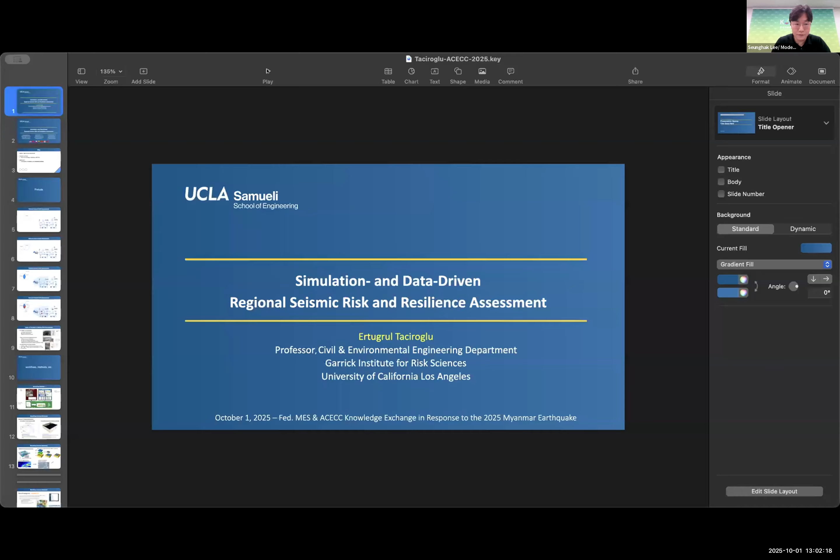Yes, Professor Taciroglu. Hello, everyone. Thank you, Seunghak. Can everyone hear me? Yes, very good. And see my slides? I can see that.

Okay, great. So I want to talk to you today about simulation and data-driven approaches to regional seismic risk and resilience assessment. And as Seunghak mentioned, I am Ertugrul Taciroglu. My name is a little bit difficult to pronounce, so people call me ET using my initials. I'm a professor in the Civil and Environmental Engineering Department at UCLA, and I also am a faculty affiliate at the Garrick Institute for the Risk Sciences at the same institution. And I'm happy to be here presenting our work at UCLA. I have many collaborators from many different countries helping all of this work, so I'd like to begin by acknowledging them.

So here's a map for my presentation. I want to talk to you about hazards engineering in general. What are the fundamental aspects and elements of doing hazards engineering? And this applies not only to earthquakes, but also other hazards like hurricanes, wildfires, you name it. Then I'm going to be specializing in the methods and tools that we use for seismic hazard engineering. I'll talk about the domain knowledge that we need for this and typical workflows to do what we need to do as engineers, and some of the aspects of the high-performance computing tools and machine learning algorithms we're using to be able to do these tasks at regional scales.

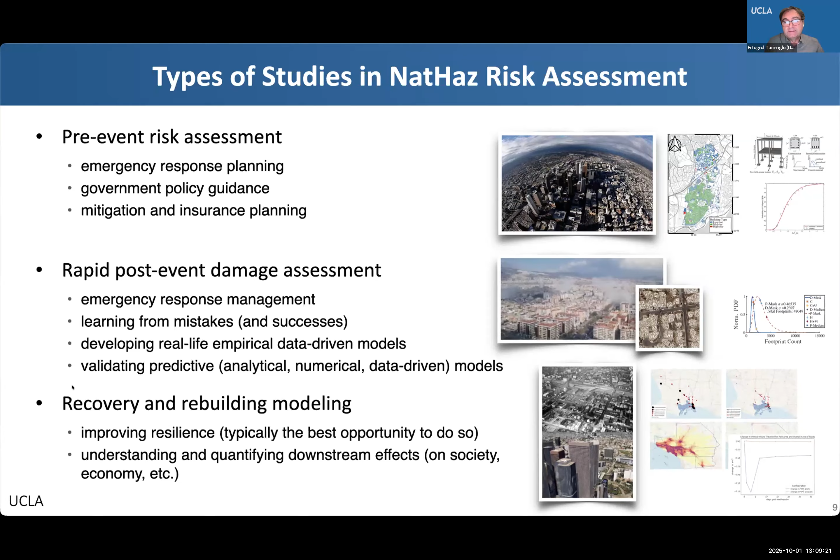So what are the typical workflows to do all of these three types of studies? And they, again, come in three pieces. One is you need to build a model of your assets at regional scales. Where are my buildings? Where are my dams? Power lines, all of these things that are exposed to this hazard. And then you need to be able to create models of these assets so that you can do analysis. So that's element number one, asset models. And I'll talk about how to generate asset models at regional scales a little bit later.

The other element is determining the hazard at a given location. What, again, is the probability of having an earthquake magnitude or a larger magnitude at a given location? If you know these probabilities, then you can design accordingly, right? So this is the hazard characterization portion. Once you have a characterization of the expected hazard, what are the probable earthquakes in this particular location of my buildings or my city? And once I have the asset models, I can combine them and do some analyses.

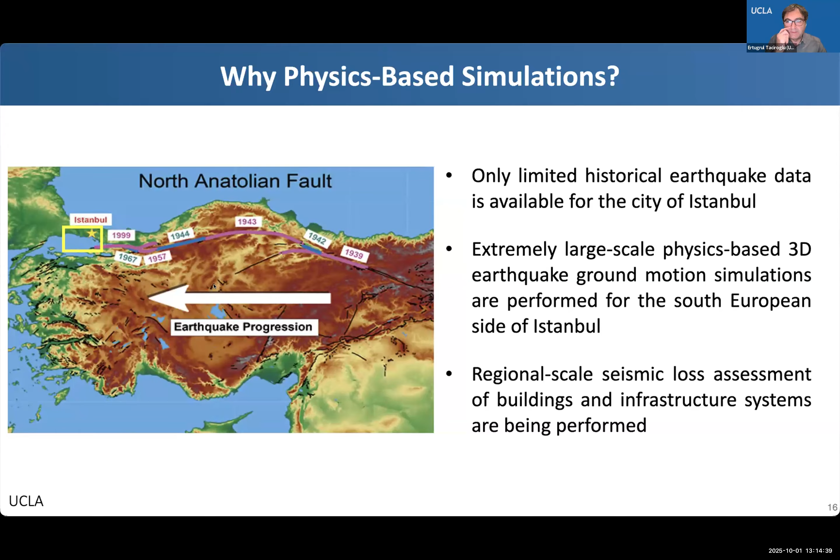The only problem here is that this fault doesn't create many small earthquakes or mini earthquakes. So generating data-driven models is very difficult. So we have to use earthquake simulations. So we have carried out very large physics-based three-dimensional simulations for this very dense portion of Istanbul. And then using those simulated ground motions, we have done an analysis of the probabilities of damage and collapse of a certain building stock within the city of Istanbul.

We were able to do so because we knew the ground characteristics of the region, obtained from the municipality of the city, where they have done many boreholes and obtained geological data with which we could create our models. And then we have simulated 50 to 60 probable earthquakes in this region to understand what kinds of earthquakes might happen. Again, these are very, very large, very fine detailed simulations that we run on supercomputers with billions of degrees of freedom.

This is a technology that's available and that can be applied to different portions of the world, provided that some geological data is available. And then once we obtain these ground motions affecting the region, we focused on different clusters of neighborhoods. This is one neighborhood in that city called the Zeytinburnu district. And we've created models of approximately 16,000 buildings in the region by using computer vision tools and some heuristic models. And then we've analyzed the responses of each of these 16,000 buildings to 60 different earthquakes to obtain their probabilities of collapse if these earthquakes happened.

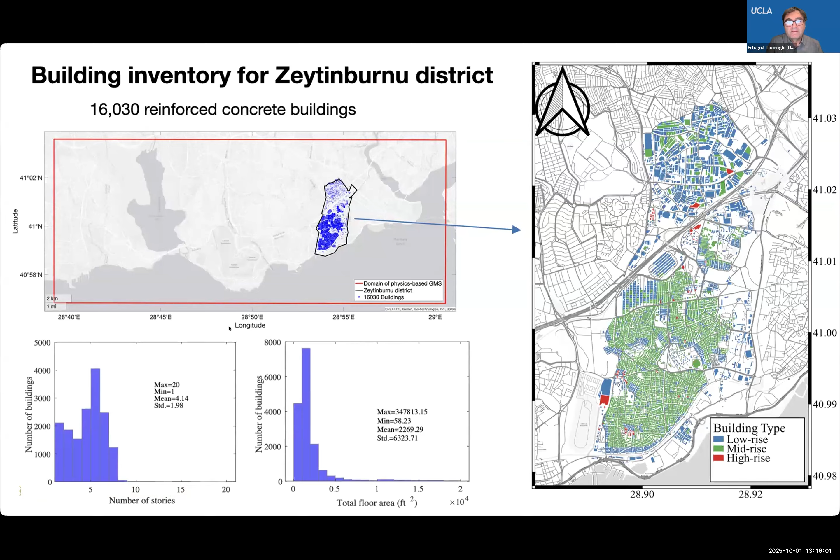And these analyses of individual building models under these 50, 60 scenario earthquakes were done again on supercomputers. And if you've done any supercomputing, you would know that this is a very scalable type of calculation. Each analysis of each building can be done independently. So if you have a very large supercomputer, you can actually do this in a very reasonable amount of time, within a few hours, etc.

So for this particular case, we have done almost 1 million individual nonlinear finite element analyses of these buildings. And we've obtained these so-called engineering demand parameters, like what are the maximum interstory drifts they are going to experience.

And this information tells us what is the probability of collapse. So we could create fragility curves and probabilities of collapse maps, and we could communicate these to the government, and then they can understand which buildings are the most vulnerable and what kinds of emergency responses they need to do, what kind of mitigation studies they need to look at. I'm skipping some of the details, but we've published this work, and if anybody's interested in the details of it, of course, I can provide you more information.

And these 16,000 building models are fairly accurate, but not accurate to the point of being almost a digital twin. But we also have those capabilities of creating digital twins, very, very detailed models of buildings individually and analyzing them individually under earthquakes as well. We can inject the regional simulations into a local finite element analysis box and do sophisticated analysis involving soil structure interaction. You're seeing a hospital building that's a braced steel frame that is base isolated, sitting on top of some soft soils, and we can analyze the response of these individual structures as well.

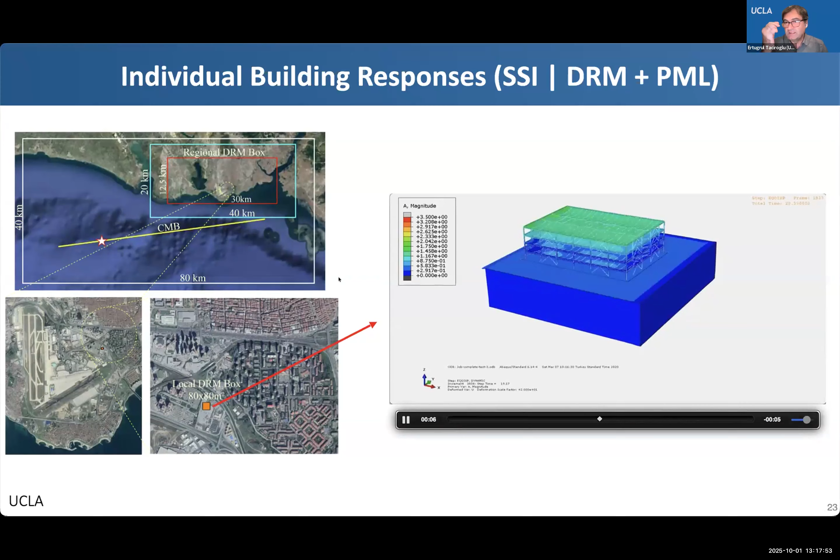So how do you generate regional asset models? How do you generate like 15, 16,000 building models? So I'm going to give you examples of work that we have done in Southern California on bridges. We have also done stuff for buildings, as you've seen, but I'll give you a more detailed description of what we've done for bridges. Bridges are nice because you drive under them, over them. They have many pictures. And so they're amenable to automated generation of structural analysis models using machine learning tools and other techniques, photogrammetry.

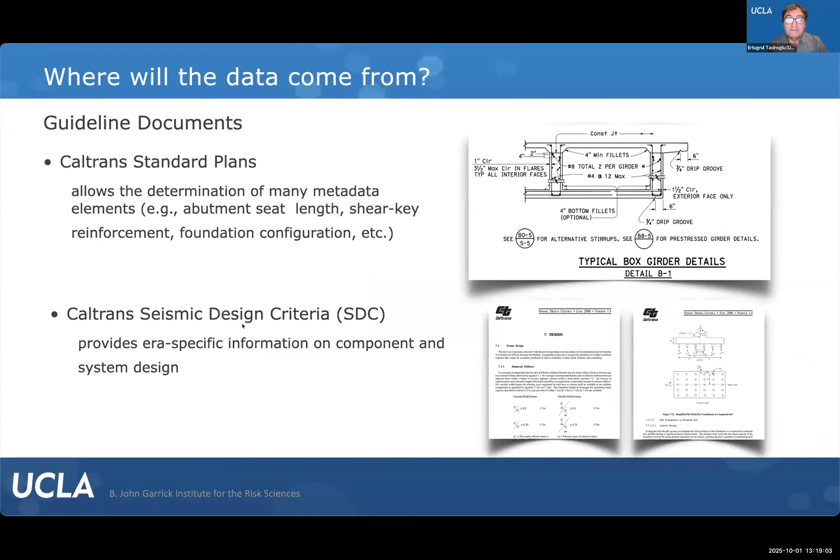So we've extracted some information from national and state databases, which is incomplete information. They're never enough to create detailed models. And there are things that are not quite visible, like reinforcement ratios and some of the structural details. But those are available in structural design guidelines of the state of California and the United States in general. So once you know some basic metadata, year built, et cetera, you can estimate and back calculate some of the other information from these design guidelines. Finally, you can combine that information with information you're observing from satellites and street view images, and you can create detailed models of these bridges.

Again, I'm not going to go over the details of our workflows to generate these bridges, but it starts with satellite imagery. We identify the bridge spines, and then we go to street view image resources and extract all the images that see this bridge from its deck and from below. We combine them, do some machine learning and photogrammetry, and identify their attributes with which we can create detailed models of these structures. Here's an example.

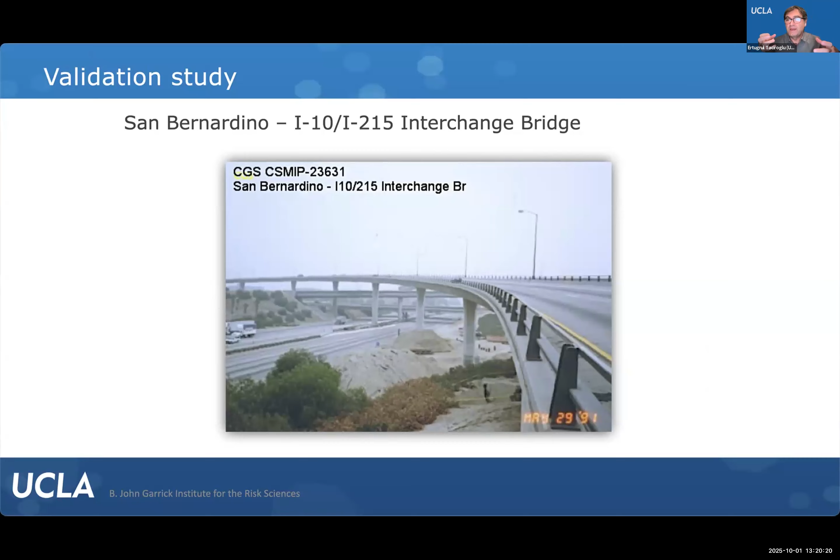This is the Colton interchange. It's a curved large bridge that is actually crossing over a fault line, and our Department of Transportation, Caltrans, was interested in us creating a model for it, so they gave us the structural drawings. We've created automated models of this bridge, and we compared it with the model we generated from structural drawings to see how accurate we can get from just image-based models. Even if you look at this bridge's photographs with your human eye, you may get confused as to which column belongs to this bridge, etc. But our automated algorithms can extract thousands of images automatically and identify all of this information.

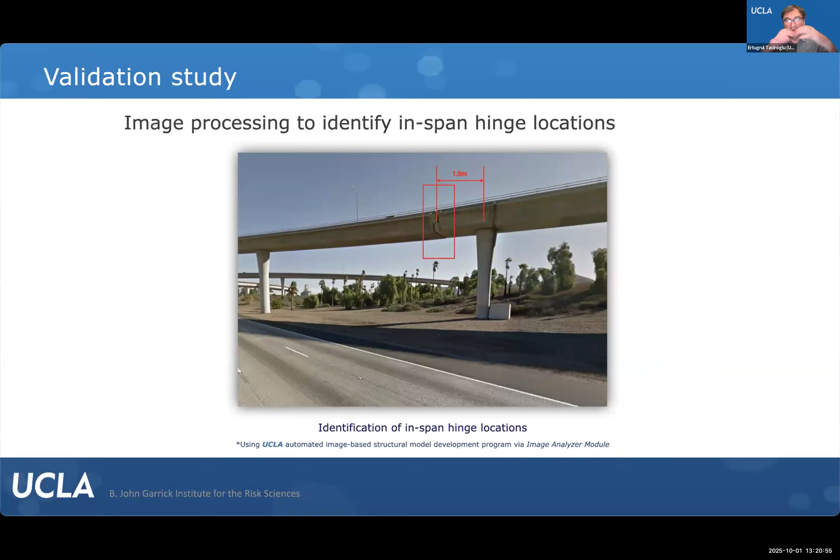Again, we start with the top satellite imagery. We extract the bridge deck elevation and elevation under the bridge of the surface so we can get freestanding column heights. Using photographs and machine learning algorithms, we can identify where the bents are, the columns and piers are. Not all of them are visible in all of the images, but a synthesis of all the images will give you more or less everything that you need. We identify other important details like the seat lengths of the in-span hinges. In California, some are shorter inadvertently and they are prone to collapse. So this seat length is an important parameter to extract.

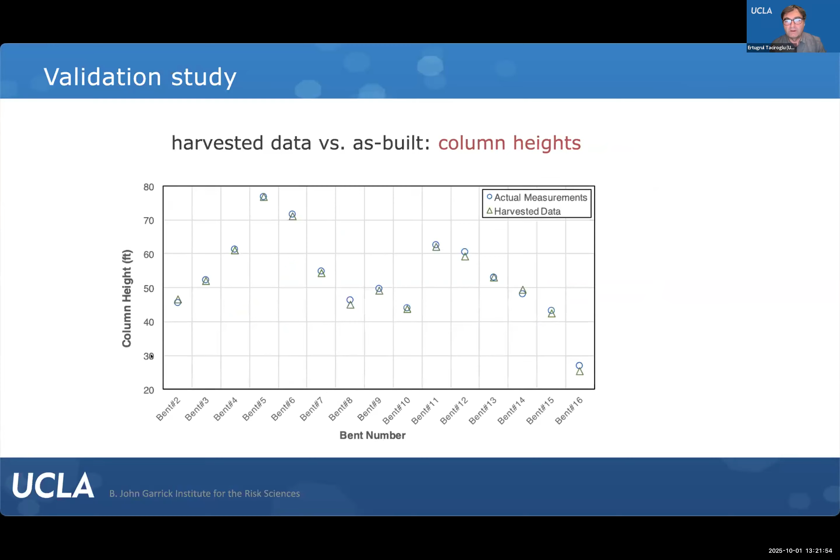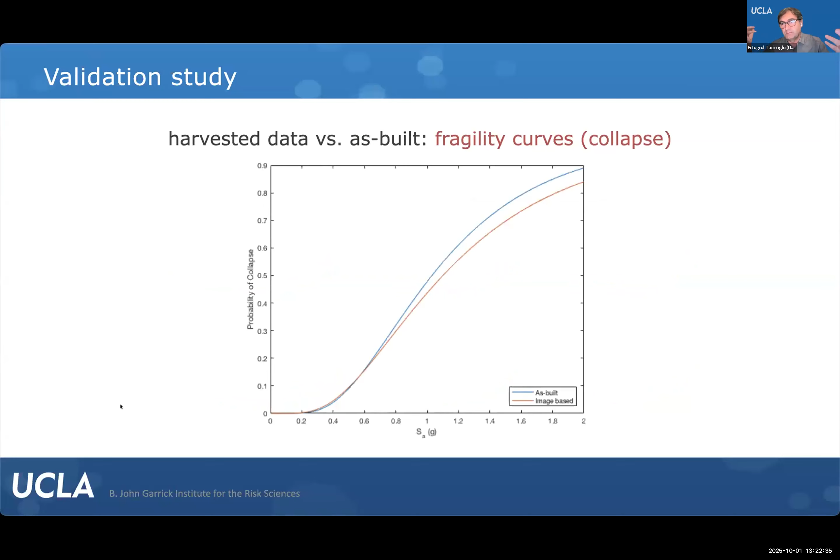And the bottom line is how accurate is the fragility curve that I obtained from the as-built drawing model versus the image-based model. And as you can see, this fragility curve between the two options is quite accurate. So this means I can use this in regional scale assessment of what may happen to a network of bridges in a given region. We've done many different bridges, you name it, and these are all automatically generated models.

And we've applied this technology to, say, the Port of Los Angeles, which is one of the largest ports in the United States, where all the goods coming from Asia are imported into the United States and get distributed. Of course, the port structure's seismic safety is important, but it is also very, very important to understand how the bridges around the port are connecting the port to the inland.

My location right now is in this map somewhere nearby. I'm just basically like 20 miles away from this Port of Los Angeles. We've simulated, say, a 7.7 earthquake, and then we've looked at analysis models and then obtained damage probabilities or damages to these bridges that we've modeled.

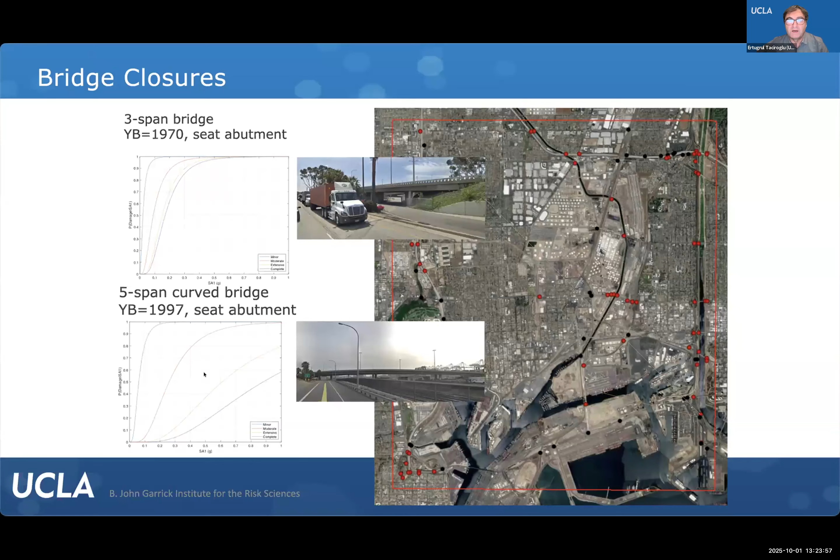So we could communicate this to the government and tell them the true value of those bridges, which far exceeds their nominal value. If a bridge closes down around the Port of Los Angeles, the amount of money it loses in a day is millions of dollars. And in a few days, it will have been losing a lot more money than its nominal value. So bridges are extremely important. So these types of analyses can illuminate that type of result.

We've also created computer vision-based, machine learning-based tools for buildings. These are tools I directly led the development for, BRAILS++ and Fortuna. BRAILS++ and Fortuna were developed initially specifically for hurricane hazards, but we've extended them also to earthquake hazards recently. So as long as you have images from the streets that you can obtain using basic cameras, we can create models of these structures quite easily using different types of algorithms.

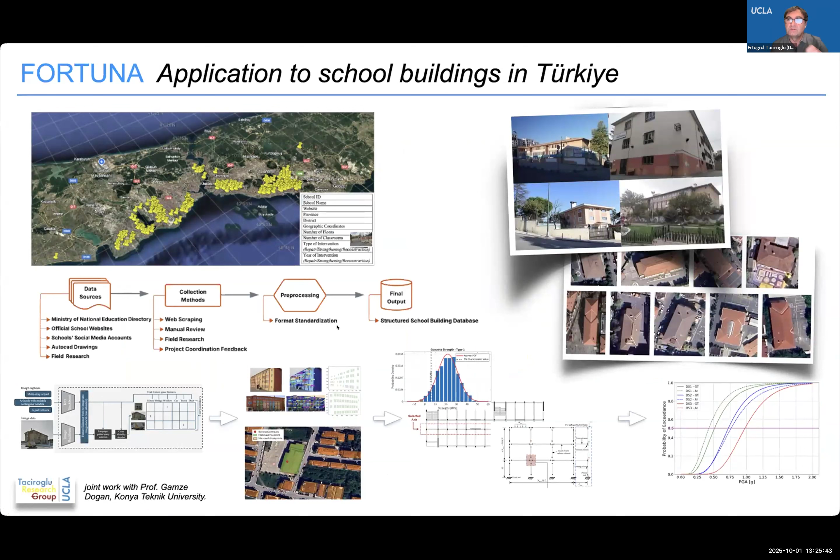We've applied this technology recently to school buildings in, again, the city of Istanbul, which are home to many children and hence are very important. So we're now doing an analysis with the government of Turkey to assess the vulnerability of these school buildings in this pilot region, to be extended to other seismically vulnerable regions of the country.

Do we need to stop operation and evacuate? When will it be safe to return? Where should we send the first responders? And then also, can we quickly assess the damage? And in that last question, there are several sub-questions: is there damage in the system, whatever that system is, is it a hospital, school building?

That's detection. Where are the damage components? That's localization of damage. And those two questions are relatively easier than the last one, which is quantification. What is the loss of strength and stiffness? Can I determine these? If you can answer these three questions, then you've done an excellent job. They're not easy. The typical approach around the world right now is generally visual inspections. Visual inspections are subjective, labor intensive.

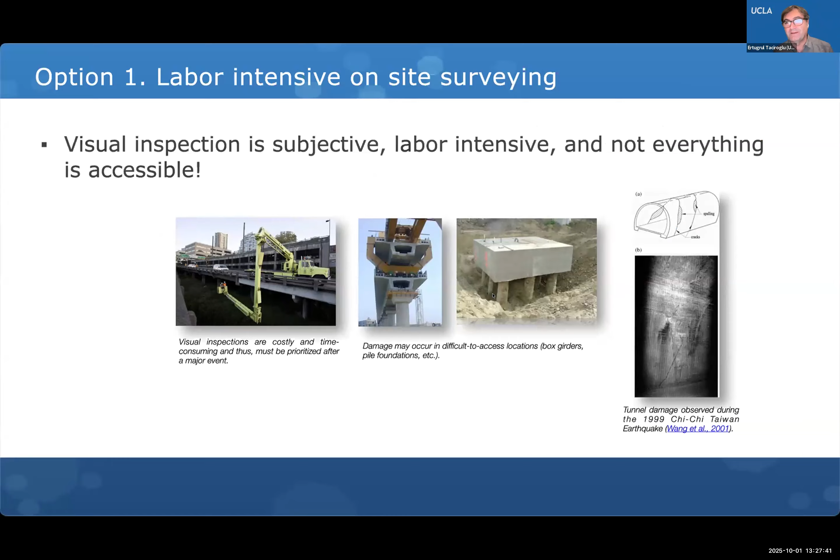They're not going to tell you especially the answers to that last question. If you have a tunnel lining that's cracked, then I ask you, what is the loss of strength? It's not easy just by visual inspection to answer that. If you have hidden structural members like pile foundations, you need to dig them up to see what kind of damages they may have suffered. So that's one option, but it's not a very fruitful option. It doesn't scale well to regions.

Another option that scales well to regions that is now becoming very, very accurate, which we've applied again to Turkish earthquake data, is using unmanned aerial vehicle images and satellite images, especially microsatellites that give you very fine resolution images from the sky. And then by training a machine learning algorithm, within minutes, you can assess the damage in a large region in broad clusters. This is detection and localization of damage, but not necessarily quantification of damage. But you can do that, and this is feasible.

Of course, if you send out vehicles with cameras, now you can get a much more detailed assessment, and we've done so. Another feasible option, which is much better than the labor-intensive visual inspections, is to have seismic instruments on buildings, especially important buildings like school buildings, etc. Seismic instruments have become cheaper. You can put them on buildings. You're seeing the study that we have done for the United States Department of Veterans Affairs.

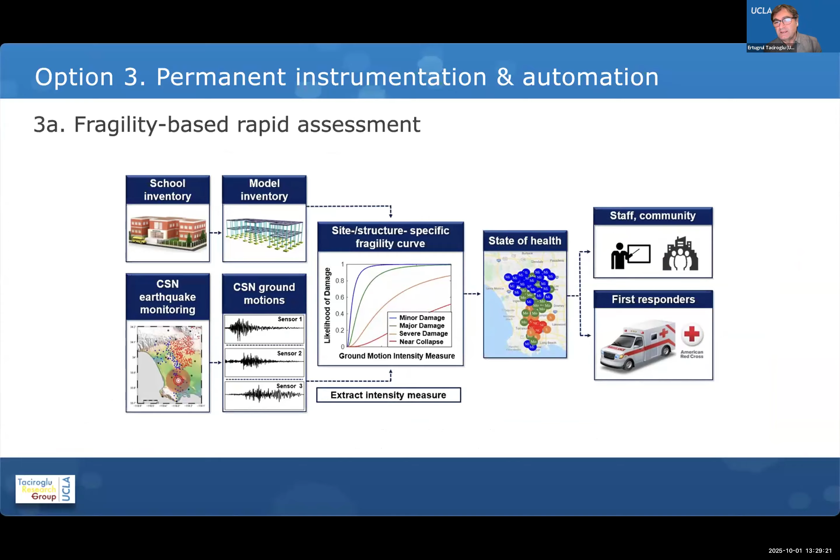They have many hospitals. We have seismic instruments in those hospitals, and we've created software with which they can rapidly analyze the damage level in those hospitals after an event without sending anyone there by using the sensor data that was collected. And you can use the sensor data in different schema, combining them with fragilities to do regional assessment. And you can quickly tell what happens in a region, which buildings are safe, the blue ones, which buildings may have moderate damage like greens and oranges, and which buildings may have suffered severe damages like the red ones.

And then you can focus on the red ones and you can do more detailed analysis if you have pre-prepared models for those assets like fuel storage tanks and hospitals and things like that. And we're doing these kinds of studies in the US with different partners. We've also created automated report generation capabilities so you can get these reports into your laptops in the field, et cetera, and distribute it to different partners.

So some final thoughts in all of these things. Natural hazard risk assessment, as you've seen, is highly interdisciplinary. It's unlikely that one type of person can solve all these problems. You need computer vision, machine learning, social sciences, economy, structural engineers, et cetera. So if you want to address these problems, be ready to collaborate with colleagues. So that's one important aspect of natural hazard risk assessment.

Another important aspect of natural risk assessment is that it bears many uncertainties. You cannot work with deterministic models. Your models will have to be probabilistic models. And in that, there are two types of probabilities. One is epistemic probabilities, which are the natural variabilities in the events that you're observing, like probability of having an earthquake. That's naturally an epistemic problem.

But there are also aleatory uncertainties, which is you do not know exactly the model, the strength, the concrete strength, the rebar ratio, et cetera, of your buildings. And you don't have necessarily perfect predictive models of what damages will ensue. So those are modeling errors.

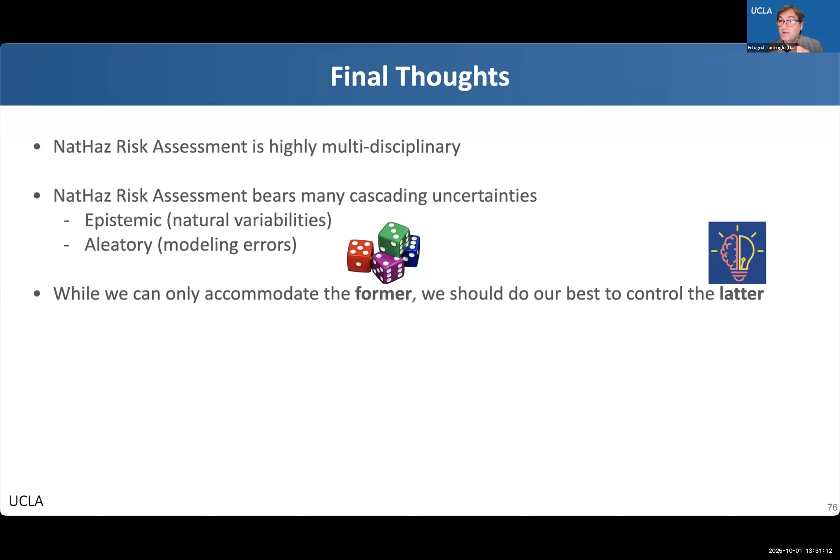While we can only accommodate the former type of uncertainty, the epistemic uncertainty, so we create probabilistic models of earthquakes exceeding a certain level, we can definitely focus on the aleatory modeling errors and reduce the modeling errors by doing better models, doing a little bit more research before the events, so we can control the aleatory uncertainties. And in that, my recommendation to everyone working in the field is to use physics-based models in general, and they will enable rational bracketing of the model errors.

So because they're physics-based, they will not give you nonsensical results. They're eliminating those automatically, inherently. It also prevents natural laws like Newton's laws and thermodynamics laws from being violated in your predictive models.

And then presently available algorithms, whether they're physics-based or data-driven, and high-performance computing resources are currently at a level where we can do analyses of entire cities. And I've shown you these examples with relative ease. You just have to put some of the resources and the teams together, but it's possible to do all three types of pre, during, and post-recovery analyses in super detail that can be useful for planning and mitigation.

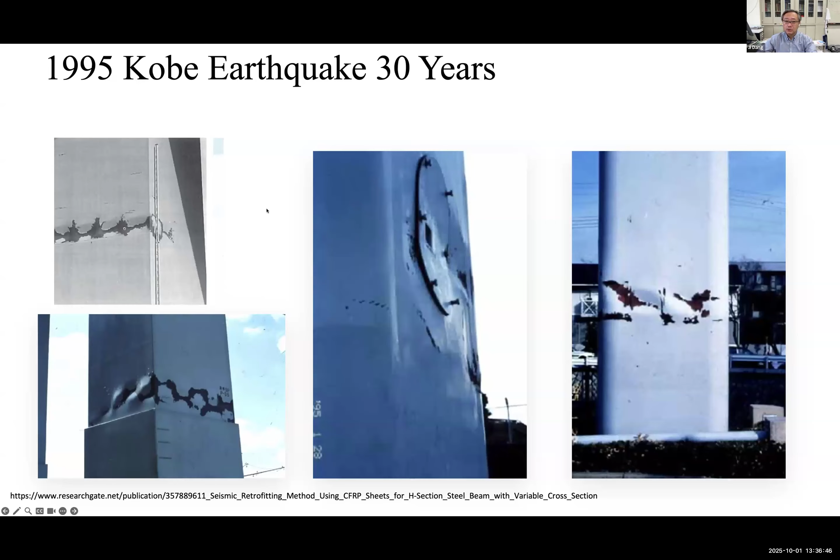And this year is the 30th anniversary of the 1995 Kobe earthquake, which, as many of you realize, brought great damage to bridge structures in Japan. And this is also the 45th JSCE Earthquake Engineering Symposium, which was conducted in Kobe City. And so we also had a special session for the Myanmar earthquake. A lot of information about the Myanmar earthquake has been shared recently.

And I visited Kobe City, and you can see some part of the old damaged port has been preserved here, and also some bridge piers being reinforced, and also some piers using base isolation under the pier, which is quite rare, I think, all over the world. So a lot of lessons have been learned in the past earthquakes.

Also, after the 1995 Kobe earthquake, we unfortunately had a lot of earthquakes after that. For example, the 2011 Tohoku earthquake, which also caused a lot of bearing damage for bridge structures. And unfortunately, the 2016 Kumamoto earthquake. And also a lot of bridge bearings have been damaged.

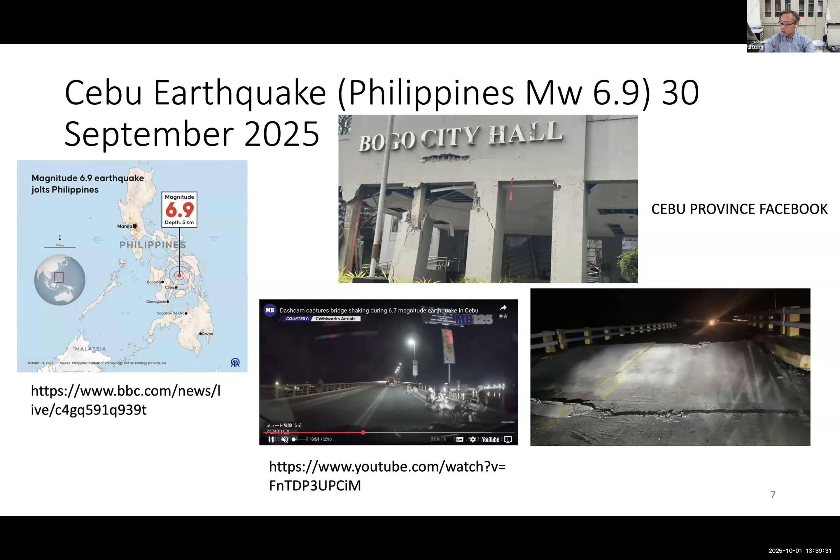And after the earthquake, we need to do some inspection of bridges so that they can urgently make sure the bridge is safe and restart the transportation function of the bridges, which is quite hard work to do, because sometimes we need some large-scale machines or specific tools to do the inspection, which leaves a lot of room to use UAVs, which are drones, to take a closer look, especially for bridges which have damage.

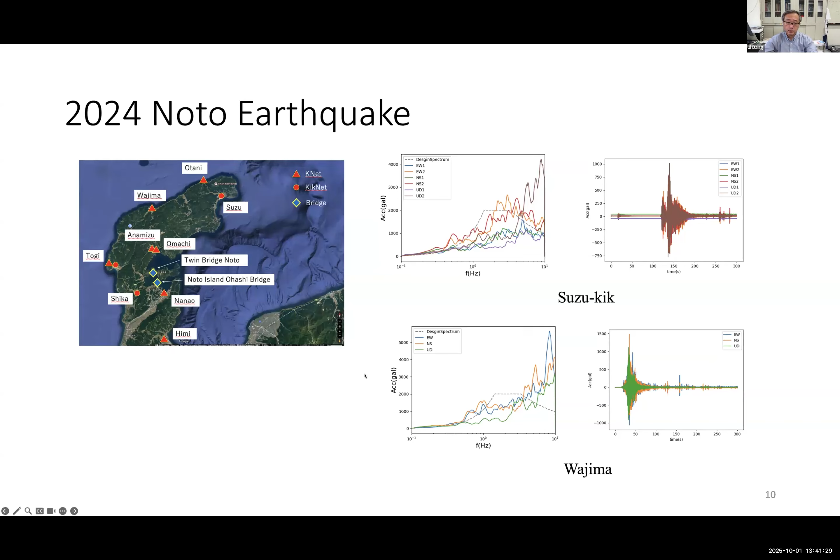We conducted some on-site inspection on bridges in the Noto Peninsula area. One of the bridges is called Twin Bridge Noto. This bridge is quite a large-scale bridge, but unfortunately two bridge abutments experienced large damage. Also, we can see the pier area experienced quite large damage.

However, with this kind of damage, it's quite difficult to let the elevation car or inspection car go above the bridge, so that we can see what's happened under the girder of the bridge, especially the bearing area and the pier area. So we used a UAV to inspect this bridge and find the damage of the RC pier around here.

And using the UAV video, we reconstructed the 3D model of the bridge so that we can take a better view of which part is damaged and how. From the video, you can see the surface cracks in quite detail, which are not caused by the earthquake, I believe. They may be caused by contraction on the surface of the concrete, but we can see quite clear information on the bridge.

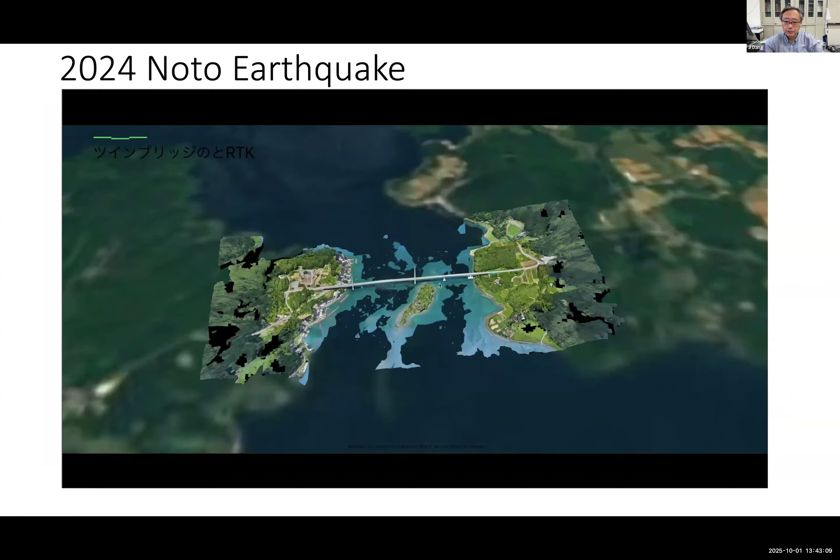Also, we took quite a few UAV inspections of the bridge and gathered overall information so that we can make a whole bridge structure model. As you can see, P3, Pier 3, also has bending damage at the base, and it is an FRP-reinforced pier, and the FRP was also broken at the base.

Also other piers like P4 here, their bearing parts have experienced some damage, so that we can have an overall image of the whole bridge, including the substructure part of the bridge and the end of the girder. This is not very clear, but we can get the whole image of the bridge.

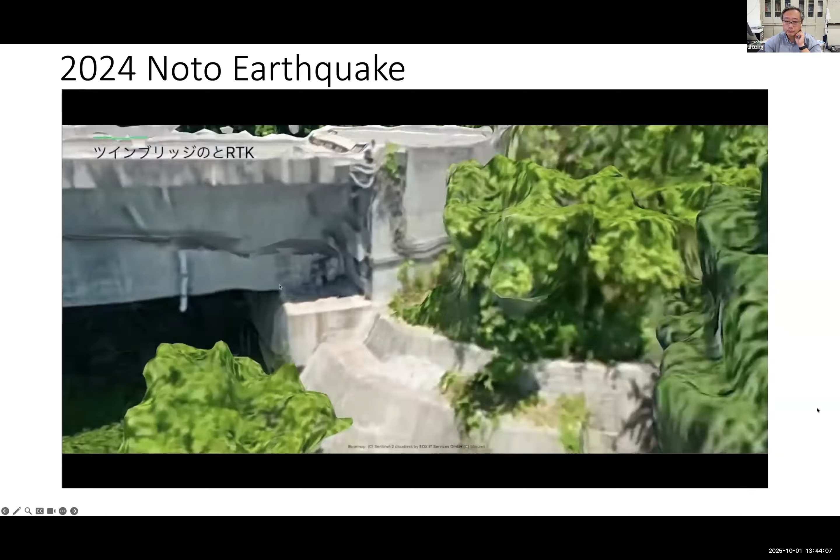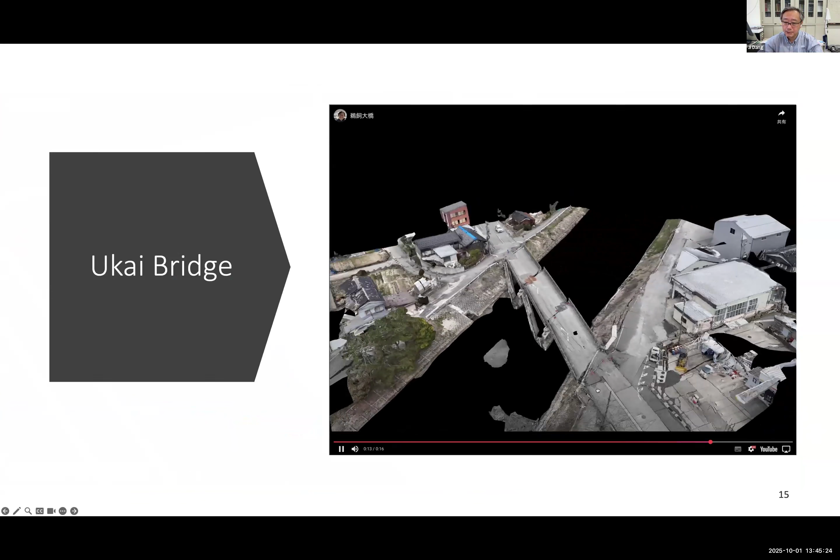This is the only bridge that was found near failure status. One part of the bridge collapsed, the span was found damaged, and other parts of the bridge were also really damaged. This is the Ukai Bridge.

So not only the Noto earthquake, but other earthquakes happen quite often recently. For example, the large earthquake in Russia in July caused a great tsunami, which made Japan very nervous. So due to this kind of situation, we find that we should do something using UAVs and digital twins of bridge structures, so that we can speed up the process of inspection and recovery of bridges.

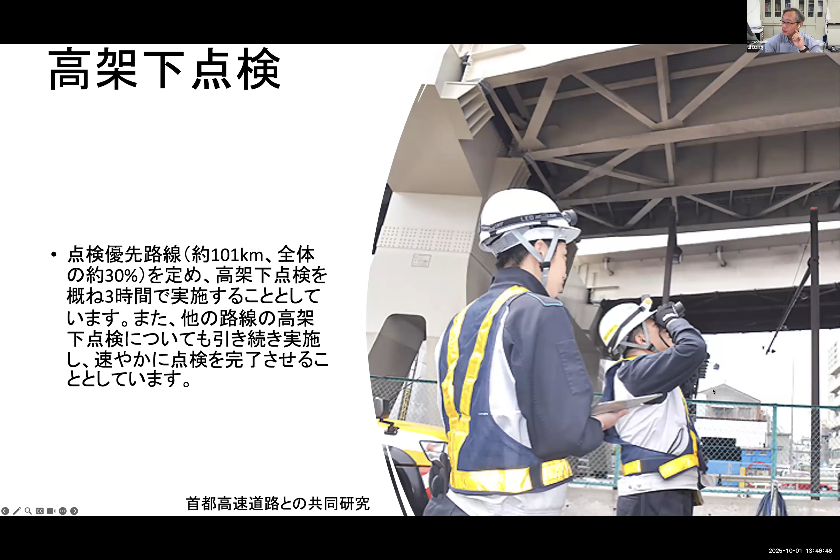By Japanese law, after a certain level of earthquake, at least the priority lines of the highway, about 30% of the whole highway, need to be inspected within 3 hours after the earthquake so that they can reopen. So people need to walk under the bridge to check its safety and give the evidence to reopen the lines.

So due to this kind of difficulty of a short time and a large amount of checking on the bridge, we propose to use UAV and digital twin to speed up this process and make everything automatic and faster. So one of the research is using the UAV taking pictures and AI to regenerate the 3D scene of the bridge under the girder, especially the pier part.

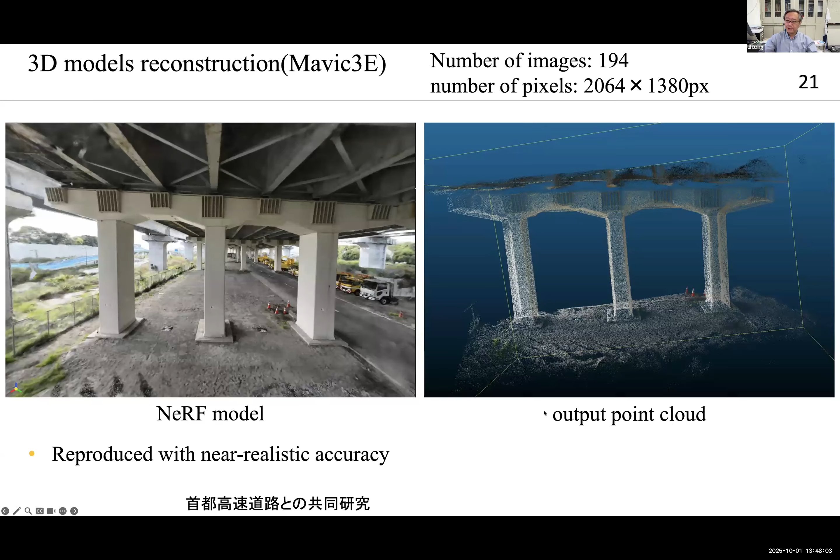Also from this kind of 3D model scene, we can extract the point cloud of the pier, which is quite high accuracy. And we tried many methods, including smartphone plus SFM, UAV SFM, smartphone NeRF and UAV NeRF, and using smartphone LiDAR to generate the 3D point cloud. You can see that each model has its accuracy and also its difficulties. We are still wrapping up this research.

Also, we are trying to understand how to make 3D models easier to use. For example, we have a 3D model from which we are trying to generate an orthoimage so that we can get a 2D plan view of the whole picture, which typically can't be captured by one camera or one photo. But we can use this kind of recaptured mosaic photo to detect the damage on the bridge using AI after getting this high accuracy result.

For example, for the pier, we have a 3D model pier that we can expose to the full size of the pier and detect damage scene by scene. So we call this 2D AI damage detection. Right now it is for deterioration of the bridge, but I think in the future we should use this for earthquake damage of the bridge.

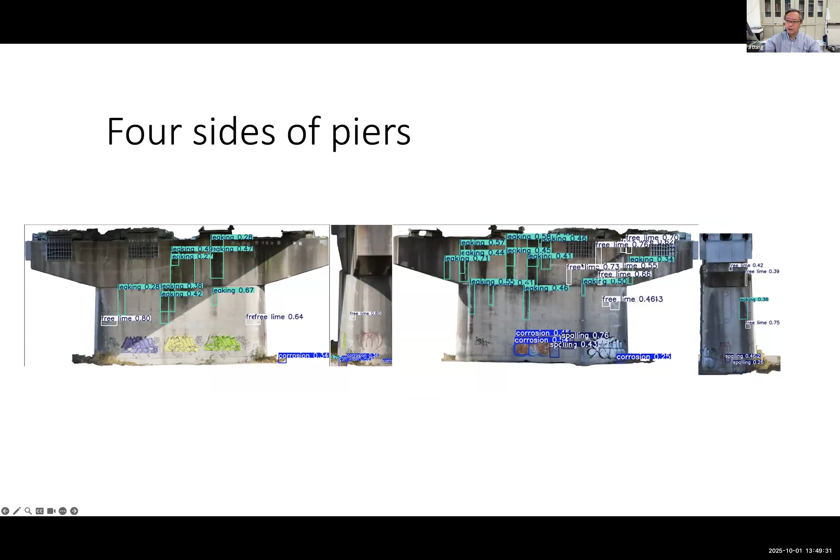Another recent research is using AI to detect pier local buckling. As you can see, in Japan, especially in the 1995 Kobe earthquake, the major damage of the piers happened in steel piers, which is local buckling. However, information about earthquake damage in local buckling is quite rare. So in this research, we used a transformer model and generative AI to generate some damage photos to help AI detect damage more accurately.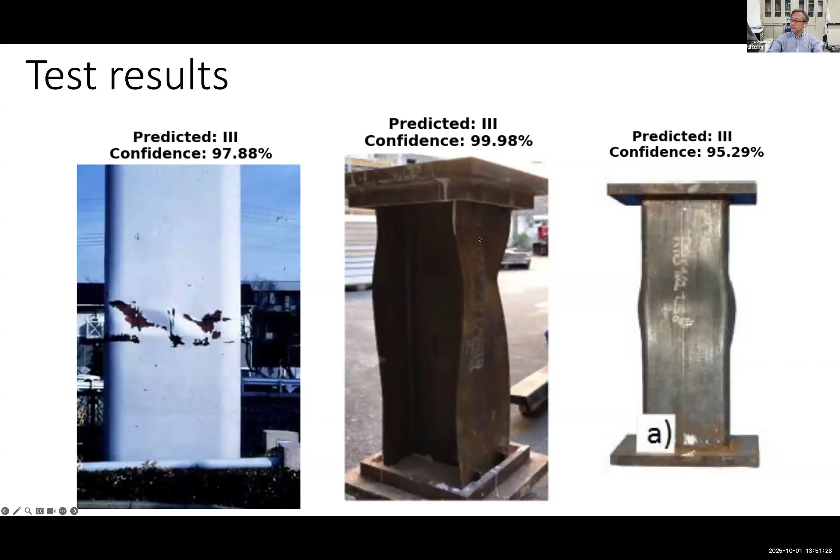So the next step is to diagnose structural damage for people using a smartphone application, because right now, especially in developing countries, after a large earthquake, we need experts to go to the site to do a proper inspection of the building. Until then, the building is not recognized as safe to live in. People will be very nervous about these buildings.

So we propose to make a smartphone application using AI that can help everyone check whether their house is safe or not. So basically, we will first have an outdoor picture to tell them if it is safe or not. If it is safe from the outside picture, then we let people go indoors to take an indoor picture. If it's not safe, then people are told do not enter the house. And there are a lot of international standards about how to tell the damage of the building. I just go through it very fast.

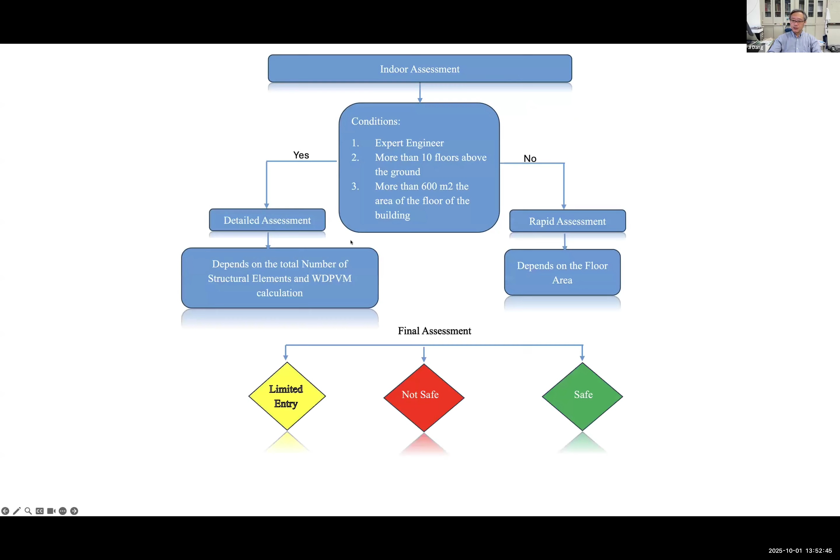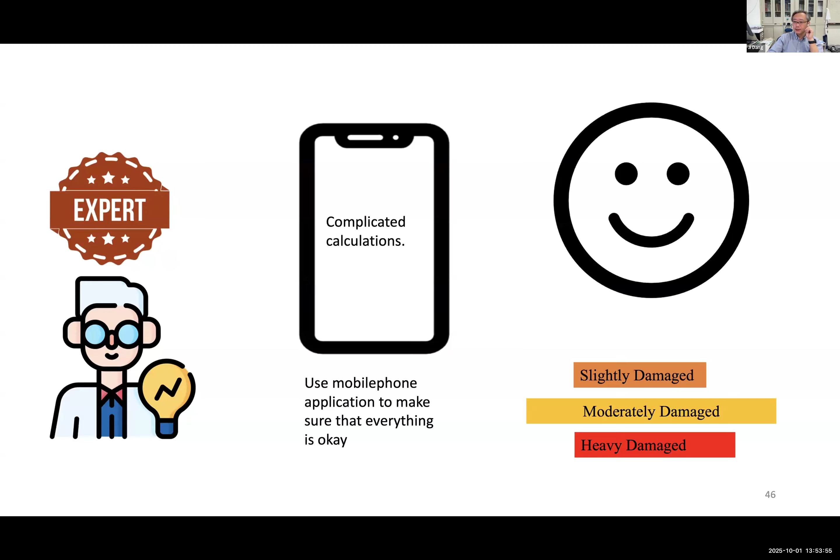So instead of the expert, we can use this application to help people check their building with 3 levels. After detection of each level, we also give them a weighted damage index to help them get the result.

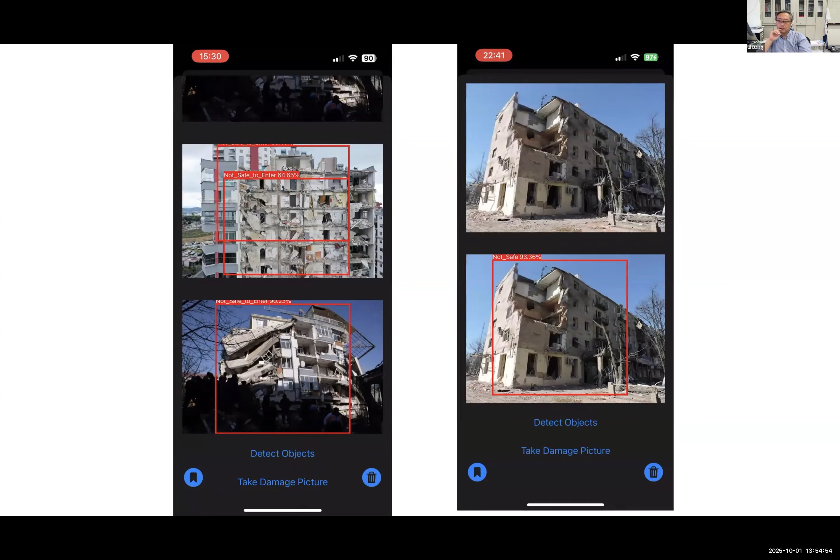So this is a demonstration of how the smartphone application works. Users take damage pictures and let the AI detect. So the AI tells you, okay, this is not safe to go, right? And you can select other pictures to let AI detect, then also the same result. And if you have indoor pictures, AI can also give you some evaluation of indoor pictures, something like this.

Okay, but sometimes the 3-color classification is not enough. We may need more detailed analysis about what is happening on the structure. So we use image captioning and natural language processing models. For example, we give an image photo to AI, so AI can tell us what's happened in the pictures. But obviously, it's not enough for us because sometimes we need other information and higher accuracy about what's happening there.

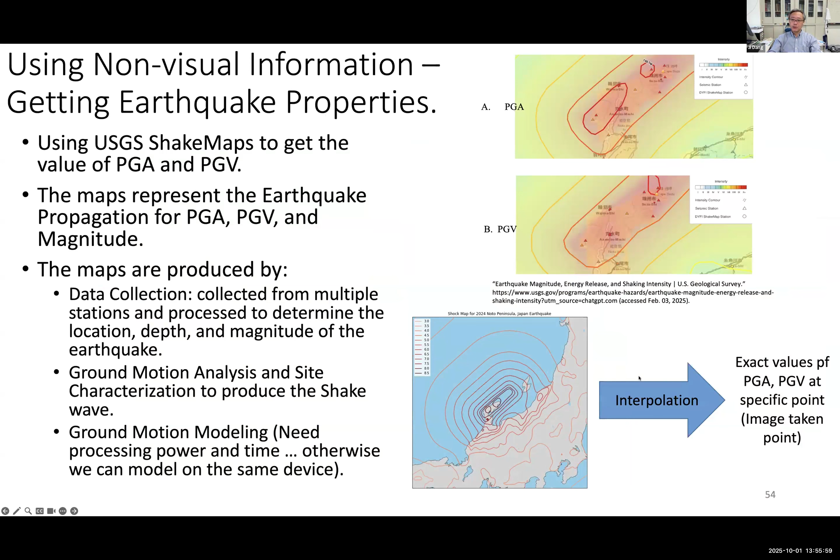So we use attention and transformer models, so that they can give us basically some caption about what's happened there. And we also connect some non-visual information, for example, the PGA, PGV of the area, and give them to large language models, such as ChatGPT, to give some more useful detection results.

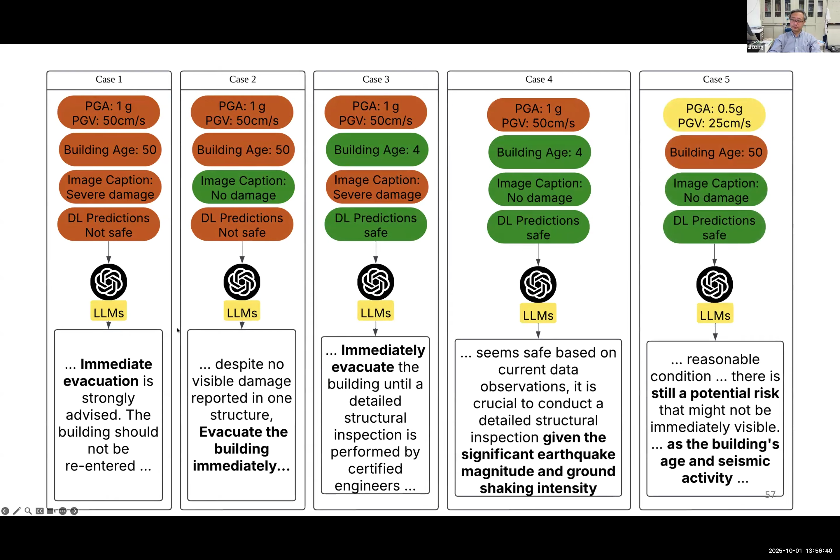For example, this is a prompt engineering format. We give them a case: damage, the building age, image caption, and give them to ChatGPT, then ChatGPT can give us some explanations of what is happening there and what we should do. And so here is ChatGPT's answer. And they not only give you the answer of what is the level of the structure, but also tell you that you need to immediately evacuate from this building.

So the threat is not only caused by earthquakes; city hazards happen due to other reasons. For example, collapse of underground structures and pipelines, and we also find such cases happen in Japan, but this one happened in Thailand just recently. Large-scale collapse of the road due to the collapse of underground structures.

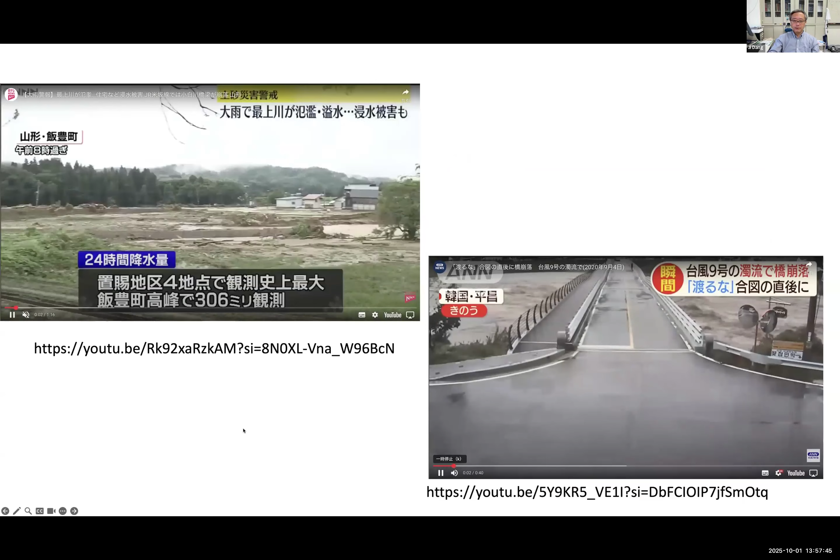And also challenges come from the heavy rain recently. I believe this one is from Korea, and this one from Japan. A lot of bridges were scoured and even collapsed during the large flood. And for example, this one is a bridge scoured by the flood and then tilted after the flood. And this kind of situation happens quite often.

For example, one case we surveyed in Kenya is that their abutment had been scoured very heavily, and after that they repaired it with some reinforcement. This kind of case happens quite often, not only in Kenya, but I think also in other countries. So before and after the flood, we take images of the bridge using UAV and make 3D models, so we can compare from above to see what has changed there.

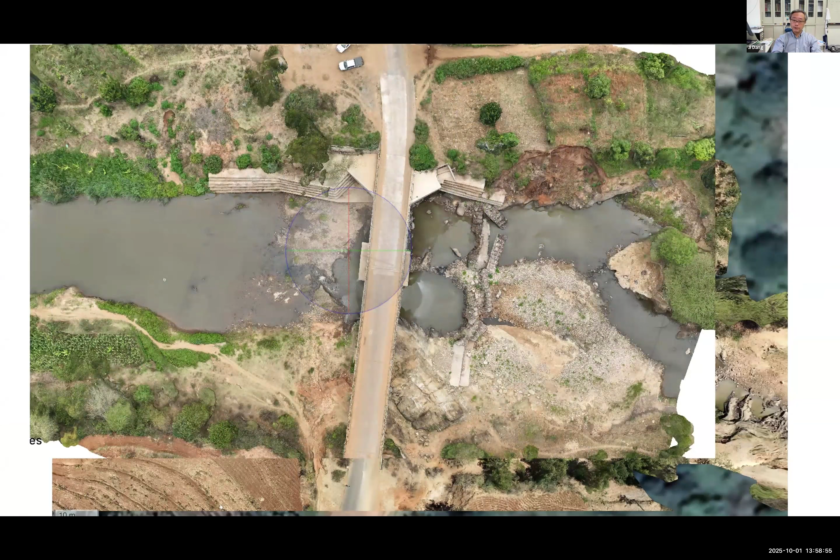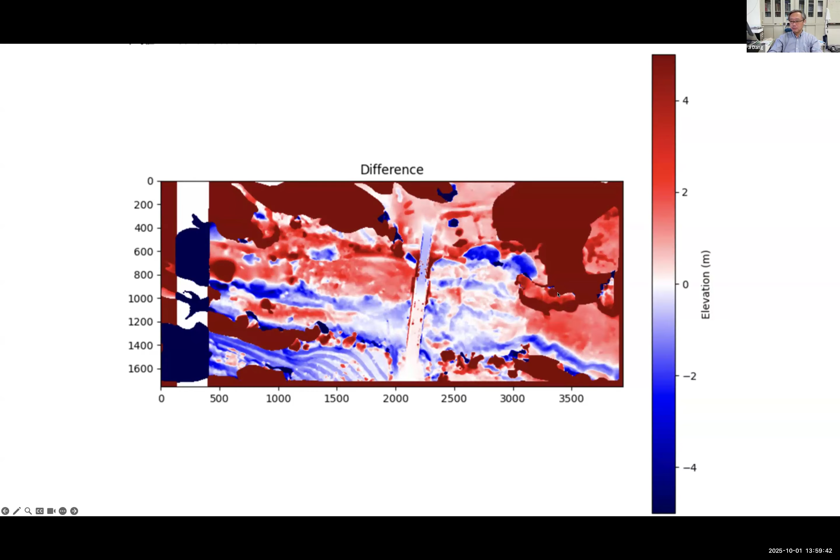Also, we can use the DEM model, which is the elevation model of each grid of the 3D model, compared before the flood and after the flood. So you can see what is happening here. For example, here we can see this area is the bridge surface, so nothing happened. The red part means the elevated part, and the blue part shows the recurrence of scouring, which is threatening the newly repaired abutment. So this is implying to us to reinforce the bridge even further.

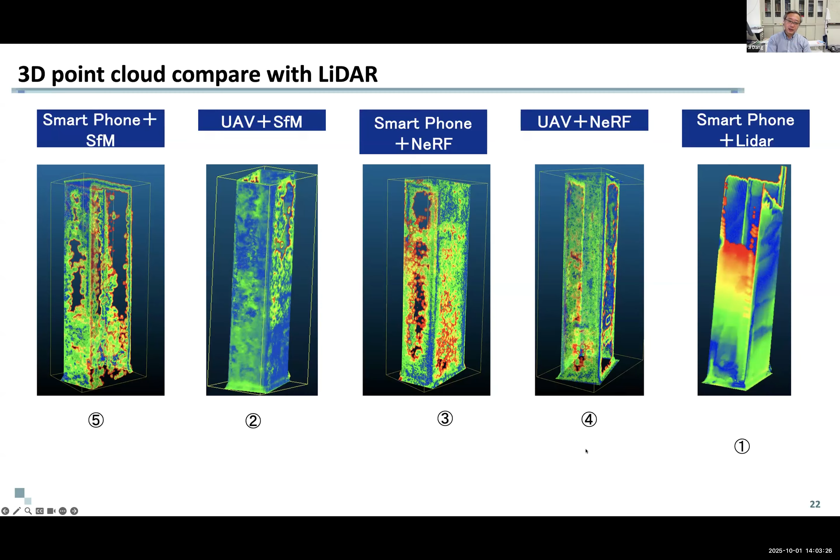So in the base part of the pier, smartphone LiDAR shows great accuracy. And we also lost some area of the surface in the base of the pier with the smartphone or UAV-based NeRF method. But we get quite a stable result using the UAV SfM method, which is quite a traditional and also economical method, but gets quite good results. So 1, 2, 3, 4 shows the order of the accuracy of the results as we evaluate so far. Hope I answered your question.

So your second question is: you mentioned you trained AI using a vision transformer to detect local buckling in steel piers. Could you explain why a transformer was chosen over CNN, and what dataset challenges exist with earthquake spectrum modeling? Thank you very much. Let me share the desktop again and go to that part of this research. Previously we used CNN to do the classification. This time we use a transformer model. One part of the reason is very simple: the transformer model originally has a little bit higher accuracy than the CNN model, not very clearly, but a little bit higher.

And the other reason is that we have very little damage data, especially local buckling data. We can only get the data from our laboratory experiments, or from generative AI, and use the real-world damage data only for testing. So in this kind of case, the transformer model has much higher ability to capture the features of structural damage than the traditional CNN model, as far as we observe. But thank you for your question, and we think we should try to compare the two methods in accuracy. Thank you very much for the question.

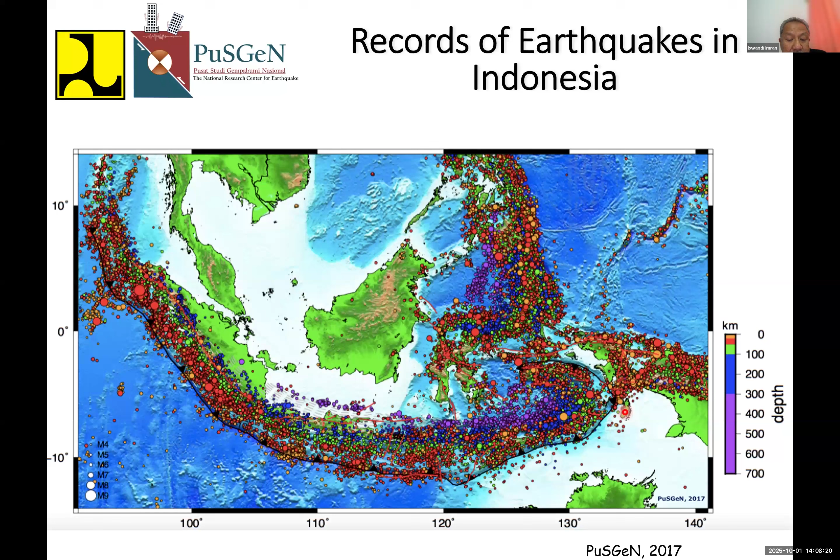I cannot move this. Okay.

In the following slides, we'll show you various structural and also non-structural damage due to recent earthquakes in Indonesia. This is from the Palu earthquake in 2018. I think it's quite well known, because during the earthquake there were also some disasters due to liquefaction. The magnitude is 7.5. Palu is the provincial capital of Central Sulawesi. Various kinds of damage were found in building structures there, such as soft story in this building, due to weak columns and strong beams, and some joint failures that caused the collapse of the buildings.

And we also have a bridge collapse due to that earthquake. The bridge used to be the landmark of Palu city. The upper structure collapse is due to the failure of the corroded anchors connecting the upper structures with the substructures, due to the local tsunami at that location. So actually this bridge is located on the seafront of Palu City.

This is from the Lombok earthquake in 2018 with a magnitude of 7.0. Lombok is in West Nusa Tenggara province. Various kinds of damage were found in building structures there, such as pounding, like this one, due to inadequate gaps between buildings, and also column failure due to the heavy floors above, and also short column phenomena because of the presence of walls surrounding the columns.

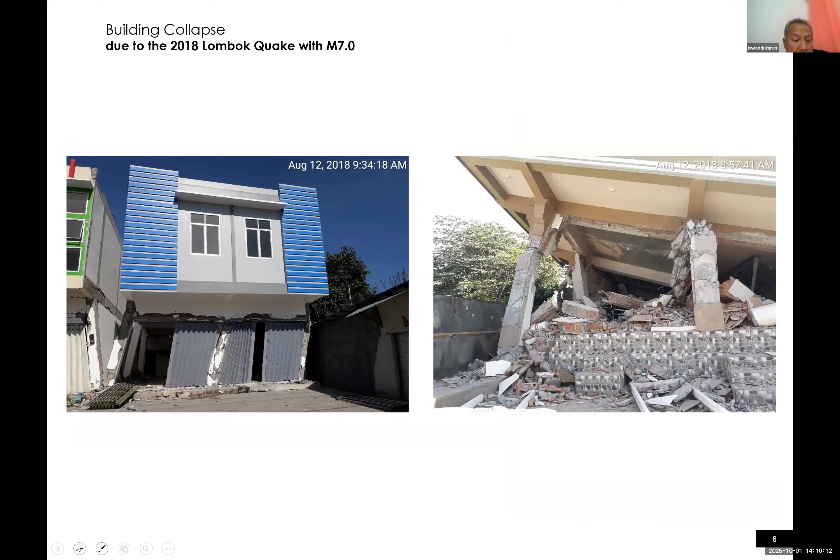This is from the Mamuju earthquake in 2021 with a magnitude of 6.2. Mamuju is the provincial capital city of West Sulawesi. This is the governor's office building before the earthquake, and this is after the earthquake. It experienced partial collapse, especially in the front side of the building, because of the heavy, strong irregularity of the building. You can see here some inclined columns and also some kind of irregularity in the stiffness distribution in this part of the building.

This is another example. This is one of the precast concrete buildings in Mamuju. The damage is due to the failure of the connections of the precast system. You can see a lot of failure in the connections, probably because the connection is not able to sustain the large deformation demand from the earthquake.

This is from the Pasaman earthquake in 2022 with a magnitude of 6.1. Pasaman is one of the regencies in West Sumatra. Most of the buildings in Pasaman are one-story residential houses categorized as non-engineered buildings. This is the typical damage found in the non-engineered buildings in Pasaman. Many people have a heavy canopy supported by architectural columns, and inadequate, incomplete tie elements in masonry walls. So the masonry wall is not confined; it's an unreinforced, unconfined wall.

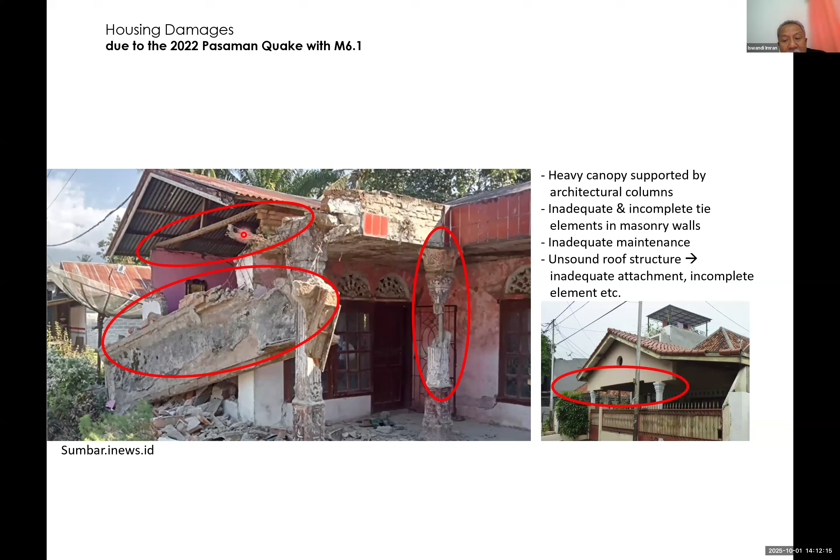Inadequate maintenance: you can see the change in colors because of not enough maintenance during the operation of the building. Unsound roof structures: you can see the support is not that adequate, not enough attachment, and incomplete elements as well in the structures.

This is another example: the collapse of the masonry wall, because you can see there is no tie element at all in this wall. The same also in this wall. And also maintenance is a problem, because you can see the change in colors. Also the wood structures are already deteriorated because of aging.

This is another example from the Cianjur earthquake in 2022, with a magnitude of 5.6. Cianjur is one of the regencies in West Java Island in Indonesia. Non-engineered buildings dominate the type of construction in that area. This is the typical damage for residential houses there, the same as in other places, like the ones I just showed you before: unconfined masonry, unreinforced masonry, not enough maintenance, all sorts of similar problems we found in this area.

This is a typical example of seismic-induced damage on non-structural elements of the building. The ceiling in this big meeting room fell down because of the buckling of this frame. You can see the frame size is so small. This is sometimes called the light steel frame, but it has not enough stiffness on the side, even though the span is quite large.

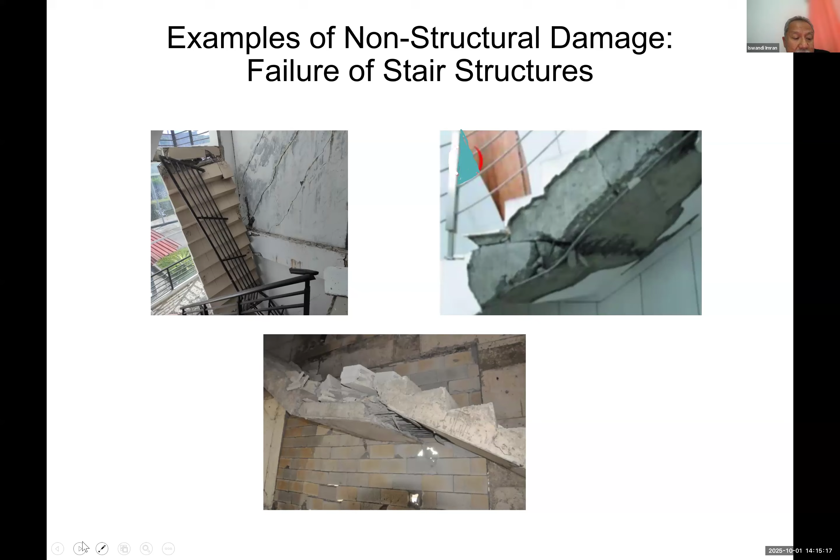So in the event of an earthquake, it becomes like a strutting element in the building. It will attract a lot of inertia forces to that area, causing a lot of damage, including to the stair itself and also to the surroundings, like what is shown here. This is also the same case. In the model, it is not connected, but in reality, in the construction, it is connected. So it becomes a kind of strutting effect when the upper structure moves relative to the lower structure.

Inconsistent construction is also a cause, especially related to material and construction quality and consistency with the design, like the example of the stair design I just showed you, where in the design they assume it is separated, but in reality it is connected. Inadequate maintenance: I showed you many examples of that, material deterioration, aging, etc.

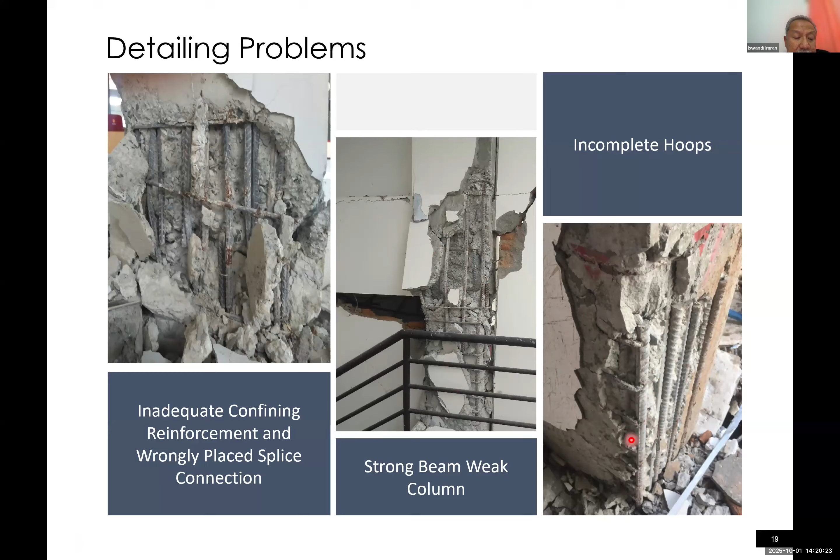This is another example, the same problem with the seismic detailing: the use of a 90-degree hook. We're supposed to use 135-degree hooks. If you use the 90-degree hook, under large deformation demand this hook will easily loosen up, like what is shown in this picture. And then confining rebars are sometimes not adequate. You see the core of the column experienced some crushing. It's not supposed to be like that if you have good confinement in the columns.

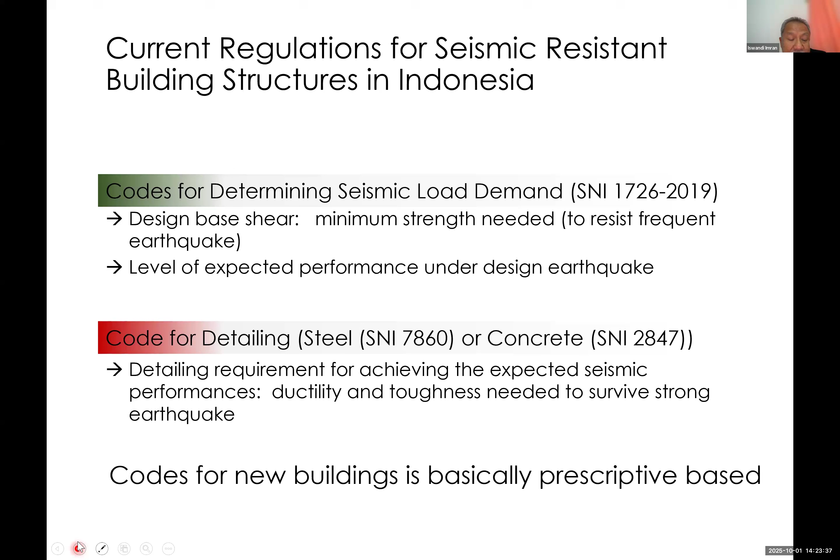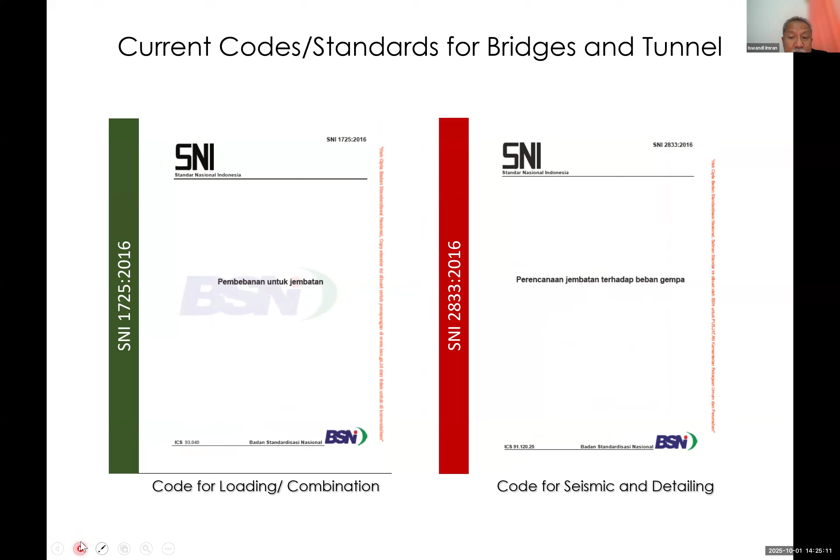Now, this is the code for the bridge design. This is also being updated this year because we're going to have a new seismic hazard map of Indonesia, 2025. Because of that, we also have to update the SNI for bridge design.

Our government just issued the new SNI code for seismic design of tunnel and underground structures this year. This is because lately we have so many new tunnels being constructed for subway, for highway, for trains, and up till last year we didn't have any codes that can be used to guide us to design tunnels, especially under earthquake.

So that's why our government initiated the development of this new code, to help engineers design tunnels, especially under seismic load.

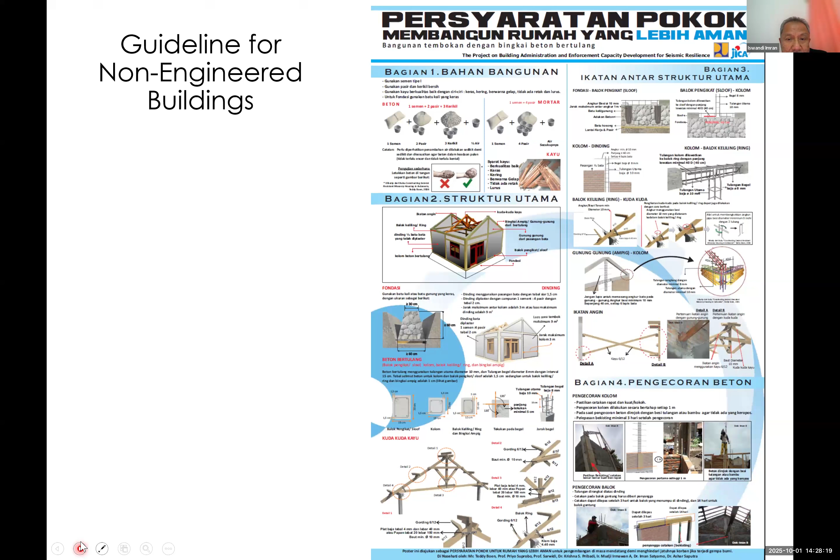The next one is applying state-of-the-art technology to reduce seismic demand, including for existing structures. Indonesia lately has produced anti-seismic devices such as lead rubber bearings, LRB, an Indonesian product, because we have a lot of rubber, so they use our natural resources to develop the lead rubber bearing. Now many elevated projects and hospitals use this device to reduce seismic forces and improve the performance of the structures, like for example the LRT and the highway in Jakarta.

And of course, we hope by implementing this approach, we can significantly reduce the seismic forces on the structures and also improve their performance.

The next one is implementation of government regulation to control building permits. So hold on.

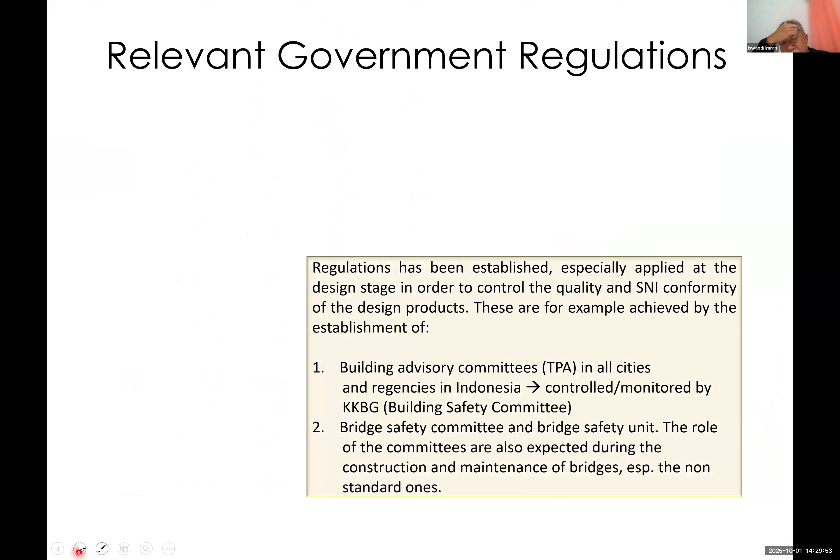Regulation has been established, especially applied at the design stage, in order to control the quality and SNI conformity of the design product. This is achieved by the establishment of the Building Advisory Committee, TPA we call it, in all cities and regencies in Indonesia. This is controlled and monitored by the Building Safety Committee in the Ministry of Public Works. This process has been going on, I think, for the last 5 years.

Okay, the next one is to develop risk maps for all cities and regencies, especially those located in medium to high seismic zones. This is developed by making several earthquake scenarios. The purpose is to identify the vulnerability and the earthquake risk in the area.

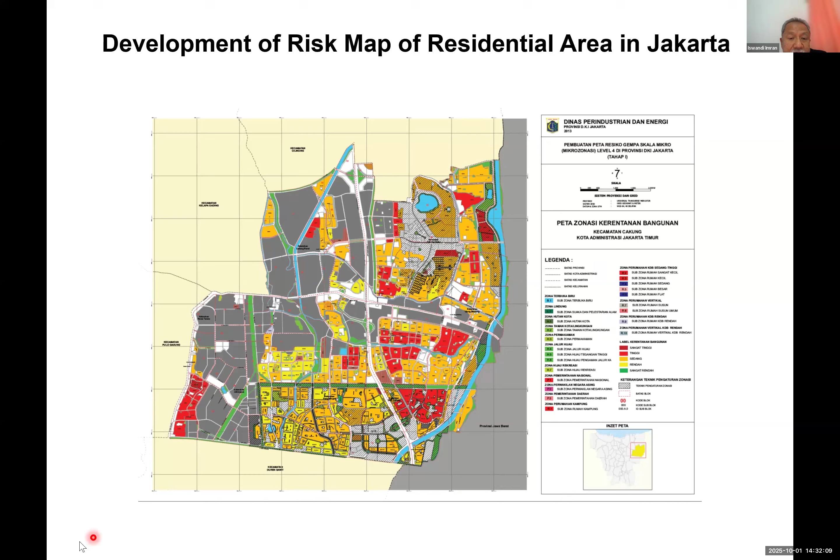This is an example of the development of the risk map in a residential area in Jakarta, the capital city of Indonesia. From this we can identify areas with high building vulnerability. The red color here is high vulnerability, the yellow one is low vulnerability, etc. This is the risk map for the residential area in Jakarta. Based on this map, we can identify the high risk zone.

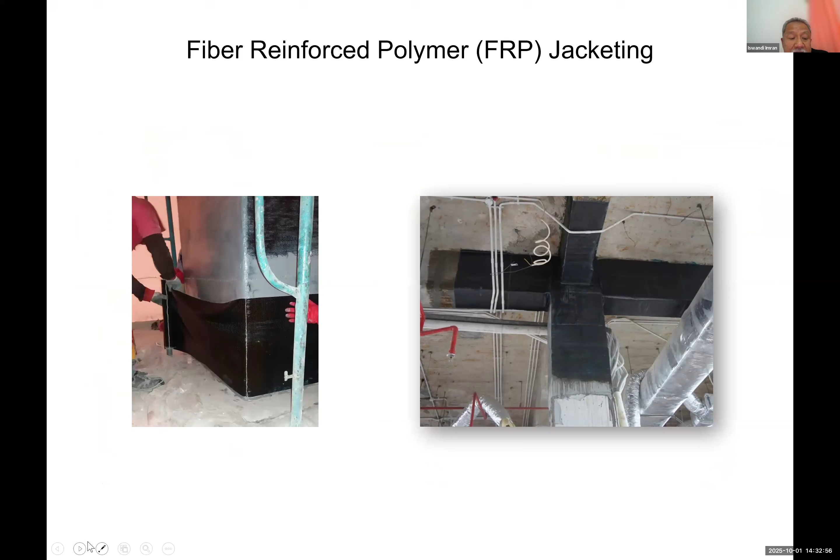The last one is to develop various retrofit strategies for existing buildings, including housing. FRP jacketing, fiber reinforced polymer, right now is I think one of the popular approaches to be used for seismic retrofitting of existing buildings. So many existing buildings now are being retrofitted using FRP, and we already have the SNI code to support that. We adopted one of the ACI documents, ACI 440, as the reference for this code, and it is already being used in many areas of Indonesia.

In addition, our Ministry of Public Works also developed a guideline for retrofitting unreinforced, unconfined masonry buildings, because this is always the problem in Indonesia. Every time an earthquake occurs, a lot of damage occurs in houses or non-engineered buildings, and most of it is due to inadequate tie elements or the unreinforced masonry being used. So that's why they are easily damaged by the shaking of the earthquake.

So the government issued this guideline together with JICA. JICA is from Japan, with the Ministry of Public Works. If you look at the content of this guideline, it gives you a step-by-step procedure to do the retrofitting or strengthening of the masonry wall, especially the one without reinforcement. So you have, for example, to open the cement plaster at the surface. After that, you put some wire mesh, and then you also put some nails in order to keep the wire mesh in place, and then again you close with some sort of cement plaster

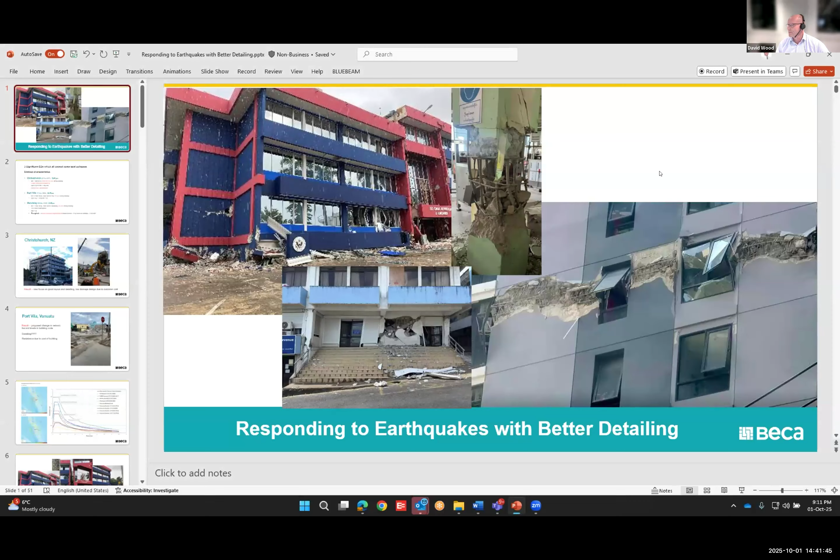Hello, can everyone hear me? Hello. I think that thumbs up is saying that you can hear me, and hopefully you can see my screen. Just let me try to, I've unfortunately got the screens the wrong way around here. There we go. Hopefully that is better. Can I get a thumbs up that you can see a full screen of my slide? Thank you.

Well, good afternoon in Myanmar, and thank you for the invitation to share some experiences from recent earthquakes. I'm David Wood from Beca in Wellington, which is a very high seismic zone on a world scale. We have major fault lines passing through Wellington and a significant subduction zone just off the coast. Beca is a consulting engineering firm working in New Zealand, the Pacific, and Southeast Asia. We have an office in Yangon, and I'd like to acknowledge my colleague Myo Tunt, section manager for structural engineering there, who kindly suggested what might be interesting for you.

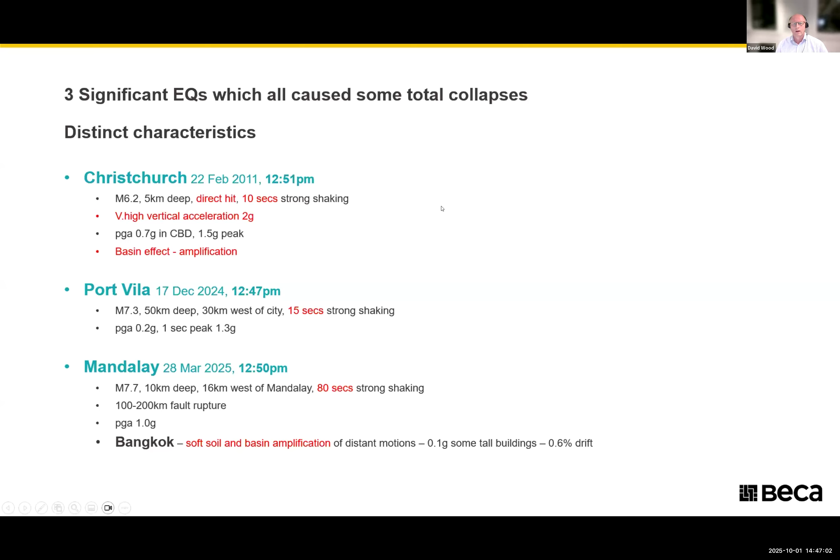And in Bangkok, because of the size of that shaking and the forward directivity from north to south towards Bangkok, and soft soil and basin amplification in Bangkok, tall buildings experienced the frequencies that got them moving. So not so much a direct earthquake pulse effect as excitation that got the long period buildings moving. So all of those earthquakes caused at least one significant collapse and sadly loss of life.

And then low damage design because of the outcome cost, something like $50 billion worth of damage and effect on New Zealand's economy. And as a small economy, we can ill afford that. So there's been quite a bit of thought about significant commercial buildings and public buildings having low damage design.

I'll move on quickly because I've got a few slides to get through here.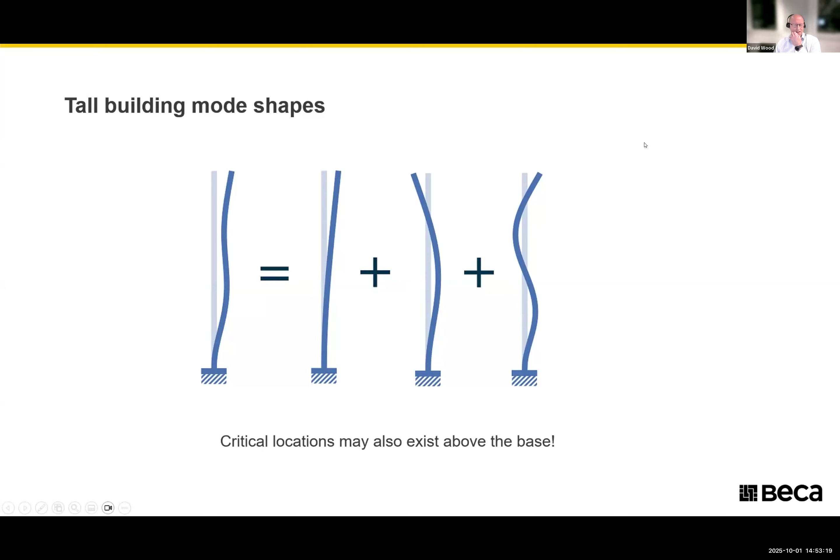Critical locations in these tall buildings can exist above the base, and this shows first, second and third mode behavior. That means you can be looking at critical locations at the base, half height, maybe 1/3, maybe 2/3. It's not necessarily all that easy to predict because of the vagaries of earthquake shaking, particularly from a distance.

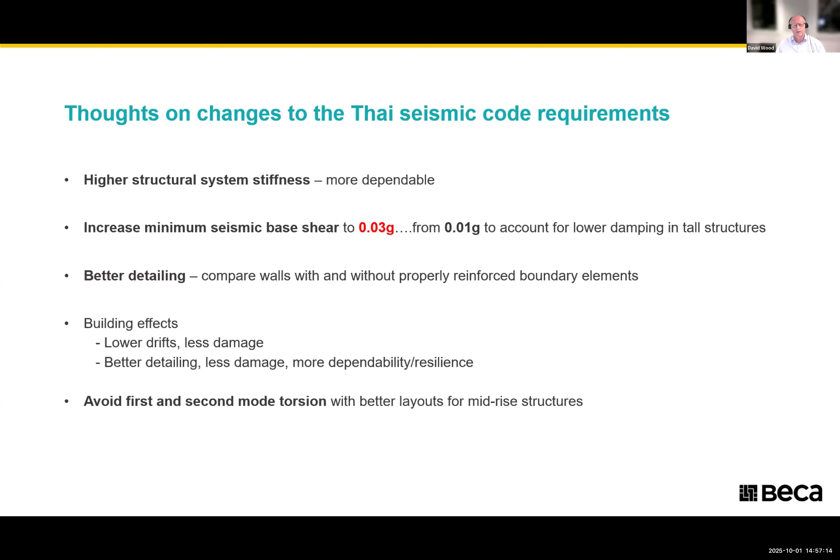Certainly since the Christchurch earthquake in 2011 in New Zealand, the emphasis has been on better resilience. And generally avoid first and second mode torsion with better layouts for mid-rise and high-rise structures. Now, this is one of those things that as structural engineers we get brought up with as we start designing commercial sized buildings in particular, but it isn't really codified. And so there can be quite a lot of resistance to this approach of trying to make sure buildings are symmetrical and that they avoid first and second mode torsion. I'll talk a little bit more about that in an illustration later on.

So I guess I ask, what will the result of all of this experience be in terms of the development of earthquake code approaches and earthquake design practice? What can be controlled? What's difficult to control is what the size and location and depth and specifics of the earthquake will be. We see that with the comparison between Christchurch, Port Vila in Vanuatu, and Mandalay and Bangkok. But I'd like to say what I think we can control, and what we see time and time again is similar types of issues through a lack of what we now understand as good detailing.

And I don't sit here claiming that New Zealand has the best approach to all of this. We have learned over the last 20 years from real earthquakes, and we would like to see that other people get the opportunity to learn as well. So into damage and detailing.

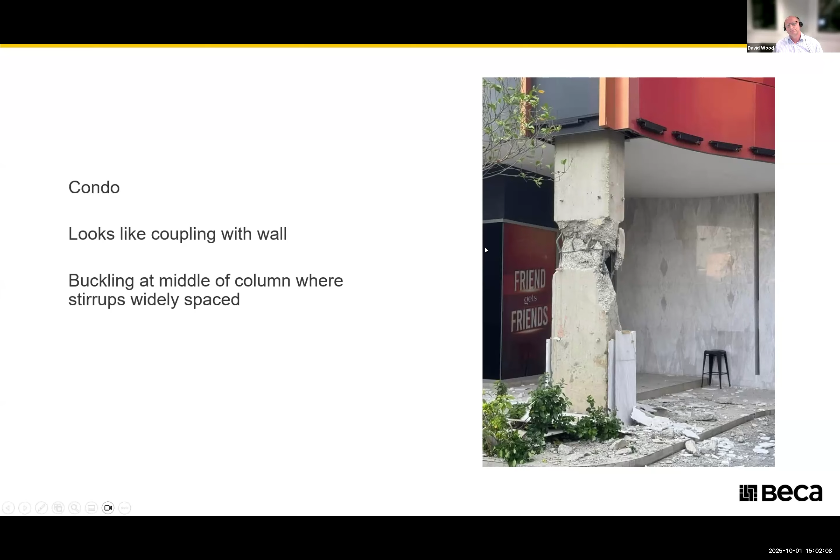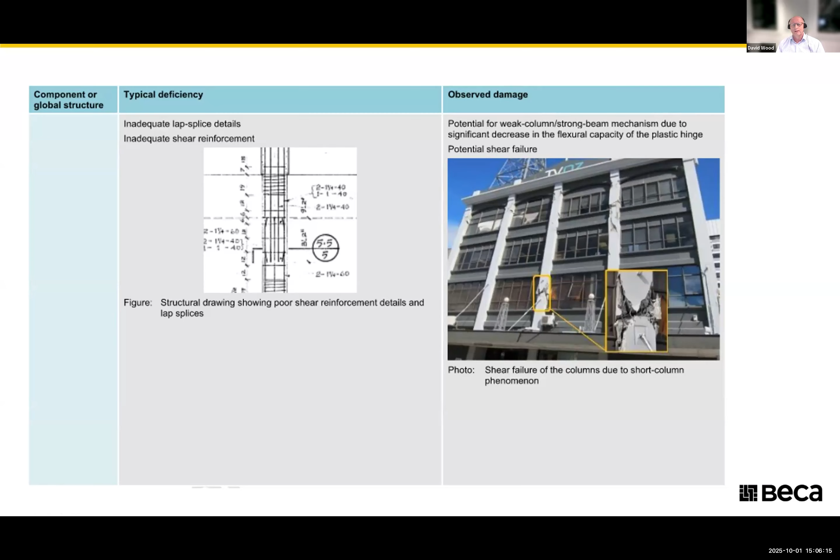Moving swiftly along. Here's a short column effect. The column is short, so it's already quite stiff relative to the beams and the rest of the building. So movement is concentrated there. It's made worse by stiff brick infills next to it, which makes the building think it's twice as wide as a column and very stiff, acting like a wall. It gets a shear failure there and really falls apart.

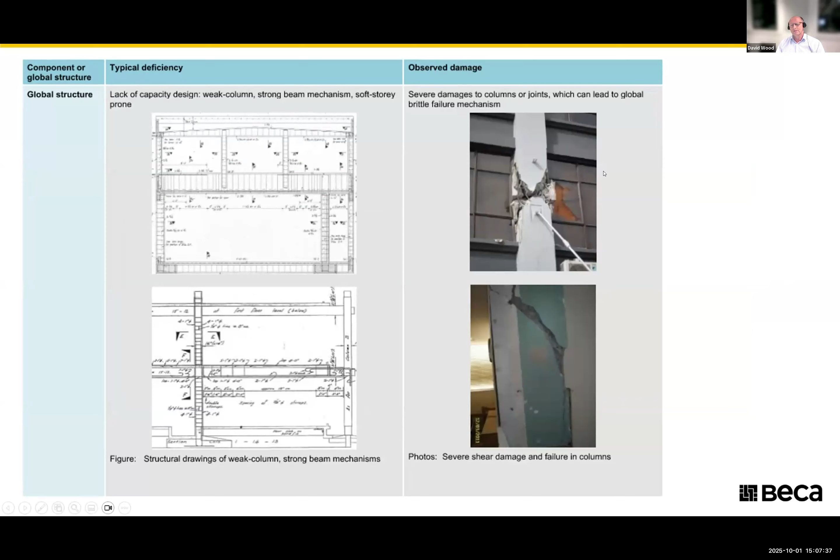This is clearly weak column, strong beam, the reverse of what capacity design tells us we would like, to avoid soft story failures. And a little bit of short column here as well led to severe shear failure of the column, which results in a loss of gravity load carrying capacity.

Another example here, inadequate confinement and a lack of stirrups in the joint means that in the critical zone at the base of the column, the plastic hinge zone, when the building movement becomes excessive and takes the column past yield, this is just blown apart and again starts to lose gravity load carrying capacity, which is the worst thing it can do.

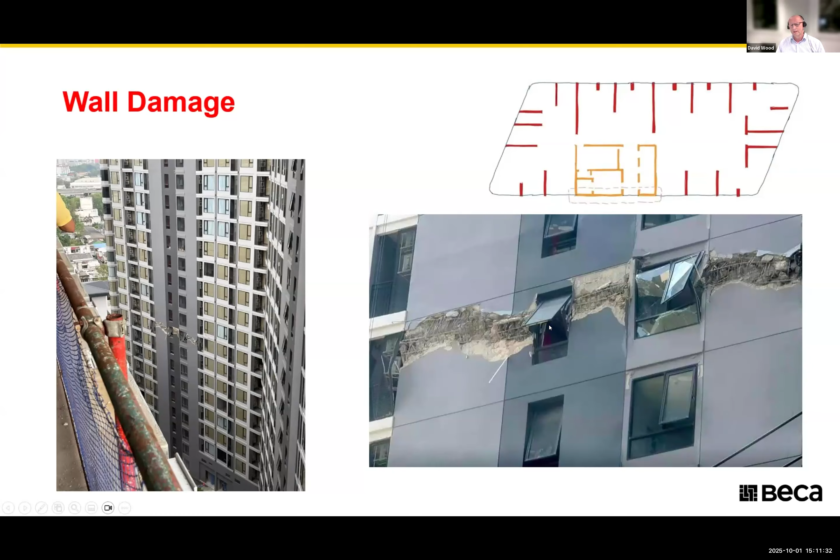That's a very difficult thing to fix in terms of how do you jack that up? You probably don't. How do you put something on that wall to replace the gravity load carrying capacity lost, and then how do you retrofit?

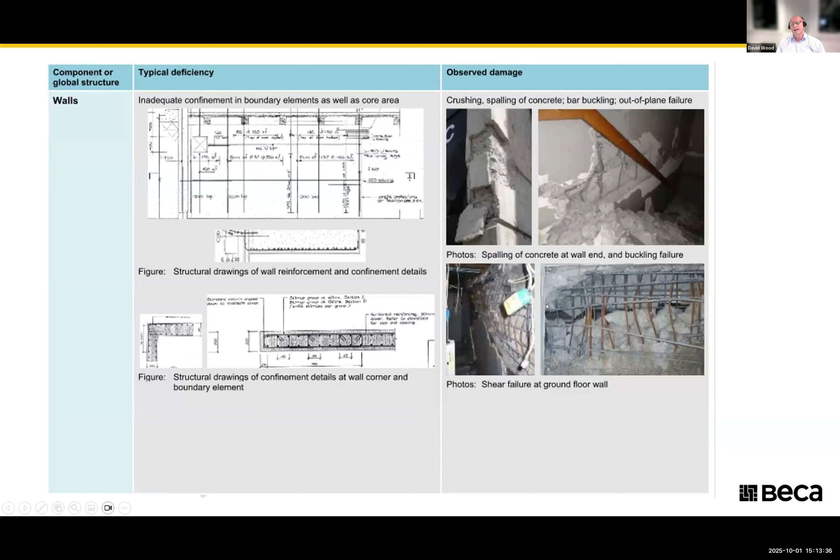Similar thing here. You can see where the wall turned a corner and had a flange. It wasn't well detailed. At the straight end, it wasn't too bad, but the horizontal bars were anchored at the end and not in a confined zone, and so they popped out. And so a combination of compression failure and a little bit of buckling, but mainly these horizontal bars popping out and no longer resisting shear, and therefore a shear failure in that wall.

Here's some thinking about how that could be fixed. Seeing a little bit of this coming out of responses in Bangkok, where shear failures in hospital buildings have occurred, probably due to the sort of detailing we were just looking at. So you roughen the interface; the existing wall's the clear bit, and the shaded piece is a bandage. That could be done in steel as well. We've seen some examples of that, but it's possibly more convenient to do it in formed up concrete in terms of the ability to get bars and materials in place rather than moving big sheets of steel in.

Hooks on the ends of the bar laps are a necessary thing, and they're part of our new code approach to try and avoid this, where a bar has a straight overlap and no cross ties, which means they tend to pop at those laps or at the ends, as we saw before. And so these overlaps have a 135-degree hook in the new piece around the new vertical bars, and then cross tying, which is important to stop the wall trying to come apart and to keep the horizontal bars acting as well as the compression zones.

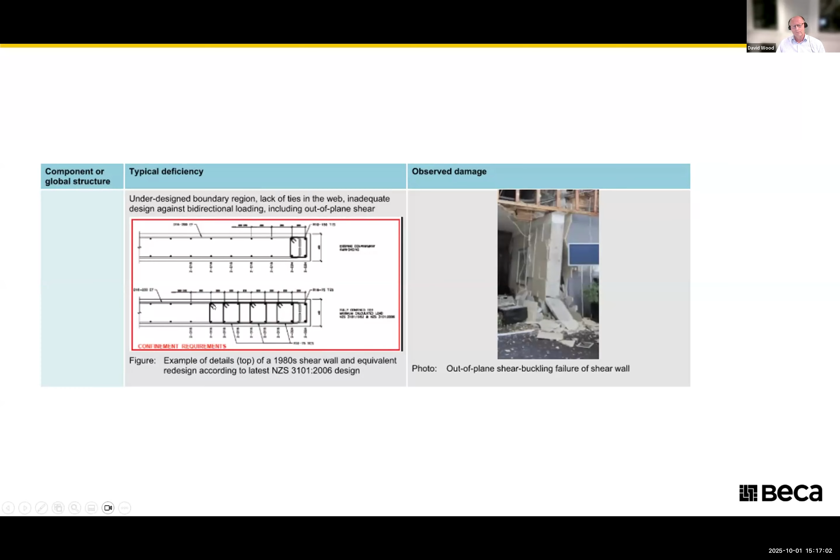This is an example of a building strengthening we've done recently in Wellington, where we've put these boundary elements in, well cross-tied, tied along the length to the existing end columns, so that relative action is transferred, and then well epoxied into the existing wall. Now, it was seen as adequate to epoxy into the existing wall because all of the anti-buckling action is being done by this properly detailed reinforced zone here.

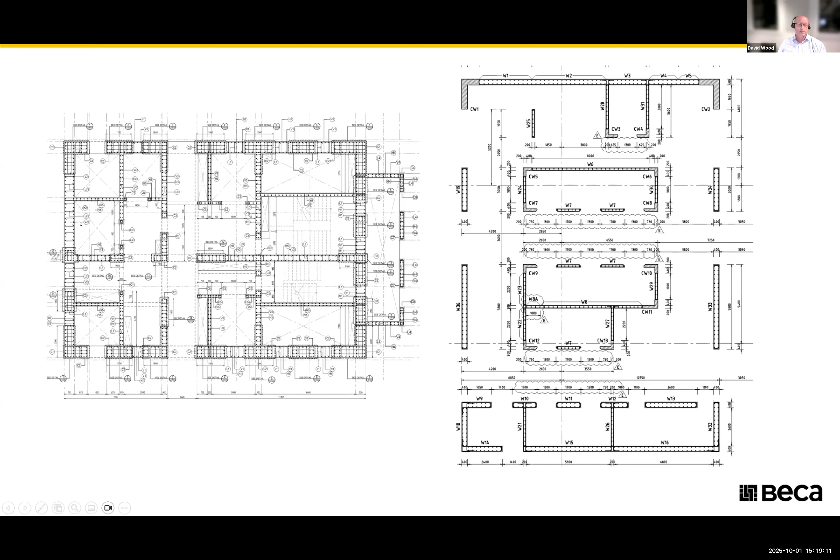And then in between, I'll show you some potential detailing for that, more around making sure that any column elements with concentrated compressions can cope, and making sure that the horizontal shear steel in those walls is adequately anchored in confined concrete at the ends of the wall and cross-tied.

Engineer Wood, excuse me? Hello. Yes. Can I interrupt? It will be appreciated if you can wrap up your presentation within a couple of minutes for the following Q&A. We have a limited time for closing the session. Oh, okay. I got started quite a bit later than expected, but I'll rush through.

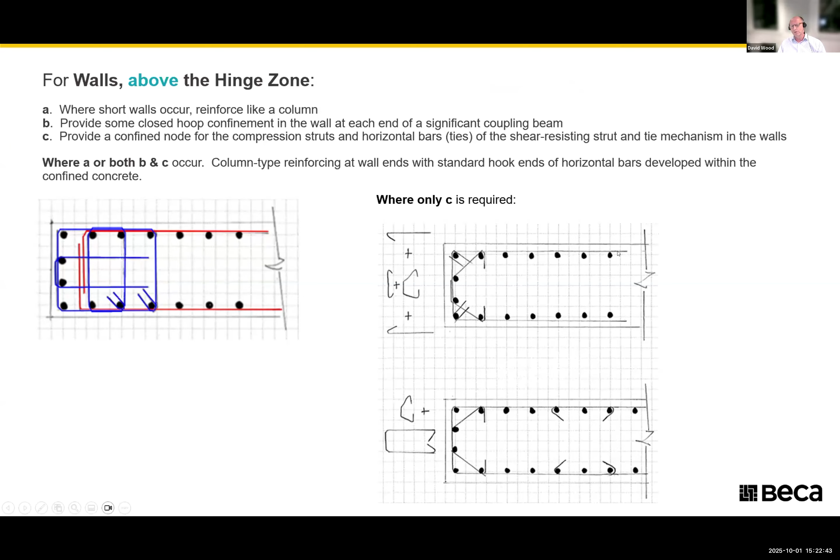This is for outside the hinge zones, detailing each side of a link beam to make sure that for localized high compressions there's good confinement and anti-buckling reinforcement, and where only good shear anchoring in the ends of the walls is required, some ideas about how that can be achieved.

Righto, low strength solid infills cause damage. Typically they're not designed for as an earthquake load path or for the stiffer response that they give. So people will design the frame and then they won't think about these in-contact infills, which end up stiffening the structure and attracting higher seismic loads and causing damage, particularly where they're partial.

We saw that with that picture from Mandalay, where you have a partial height infill and strutting there. You can get pressure points on the columns, the effective shortening of the column and shear failure, and some pounding as the frame goes back and forth against that.

So either separate the infills from the frame with localized detailing, which we prefer in New Zealand, given our high seismicity, so that the frame as designed can respond in a ductile fashion, or design for stiffer response and work out ties for the struts, the diagonal struts through the infills.

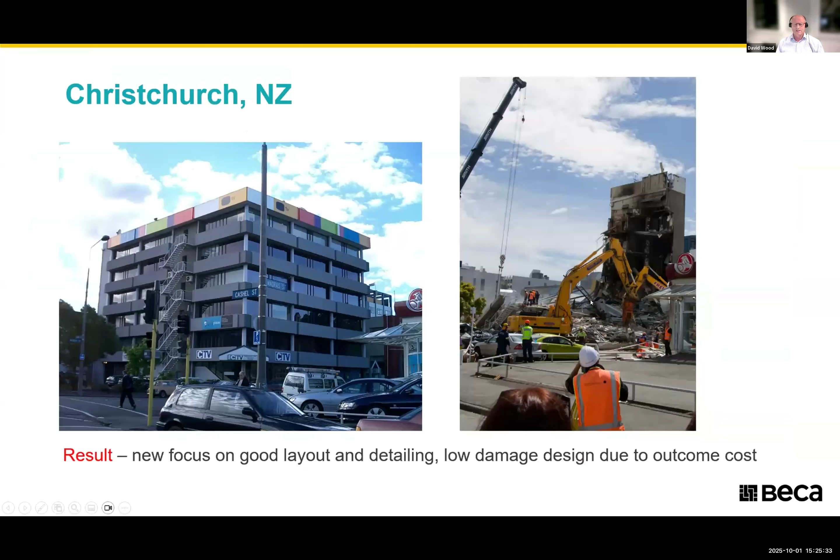And so all of those things meant that the poorly reinforced columns just couldn't cope with the rotations, and the building rapidly pulled away from its core, and therefore it collapsed in on itself for a total disproportionate collapse.

In summary, in terms of detailing, just a couple of things that I've noticed in various earthquakes: confinement is key. Don't underestimate it. Whether the codes tell you to confine or not, be a structural engineer and think about where those areas of high compression or flexural yielding will be, and provide closer stirrup centers. If you think they should be closer than what your codes say, put them in. The cost of that is really relatively small.

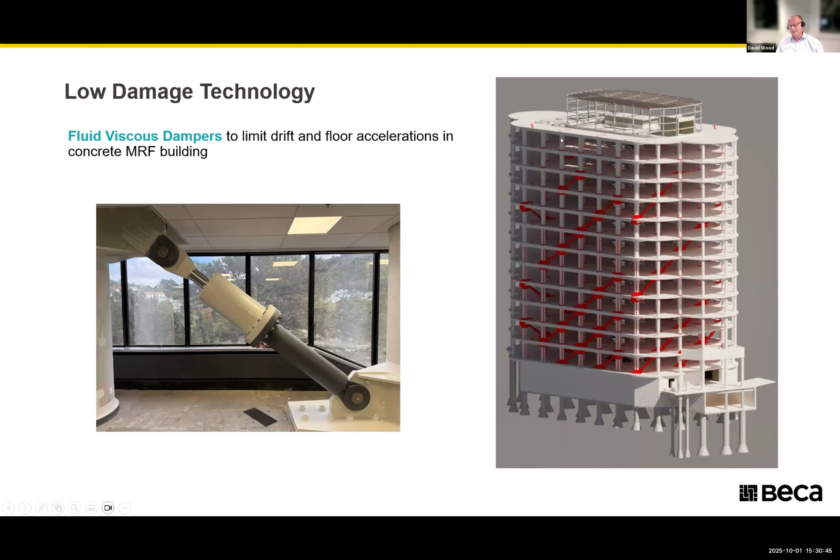So the main idea here was to stiffen the building. Sorry, not stiffen the building, to soften the building, to reduce the building displacement while not changing the overall frame stiffness. And so that means damping. And the dampers go a fair way up the building because the hollow core floor has a very thin 65mm overlay as a diaphragm. And so to reduce floor accelerations and reduce the amount of diaphragm strengthening, we put more dampers further up the height of the building.

Thank you very much. Hope that was of some interest.